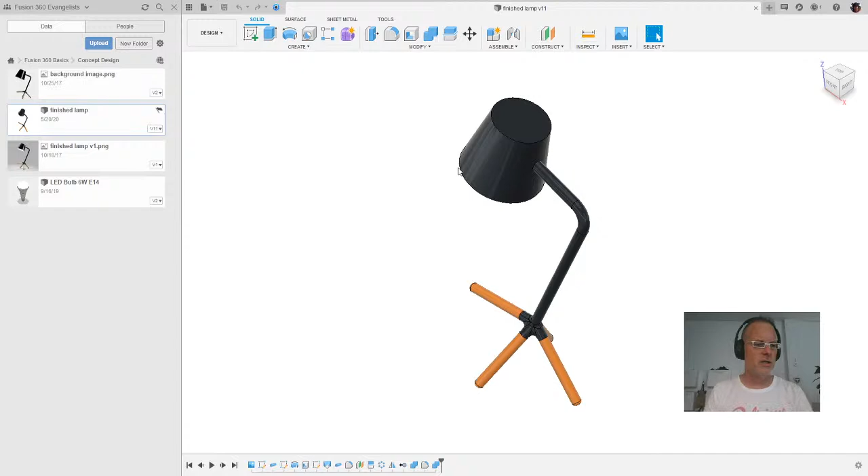And for today's example, I might as well go ahead and open up a finished example so I can show you what we're going to be working on together today. And this is my Fusion. Perhaps you know it. I hope you love it. We're going to be doing a small little table lamp of somewhat questionable aesthetic, depending on whether or not you like this. And I hope that you will be able to follow along and actually click with me. It will be a little bit difficult, I think, to interact because the only option I have for interaction with you is through the chat. And so we'll see how this goes and try it out.

Now, why did I choose a table lamp like this? Well, to be honest, a number of years ago, I was thinking about what could I do as a very basic Fusion primer, and I thought about all sorts of things. And I've been in this industry for about 25 years, and I have worked with other CAD companies and other CAD softwares. For some odd reason, all of the initial tutorials were always small little desk lamps that were not really very attractive most of the time.

But after a lot of soul searching, I thought, well, why reinvent the wheel? So I made a little desk lamp as well. And this actually is a multi-part course that I've given many, many times, both live, and I actually have videos on YouTube as well showing how to make this lamp, going all the way from concept design to finished manufacturing design. So let's begin together.

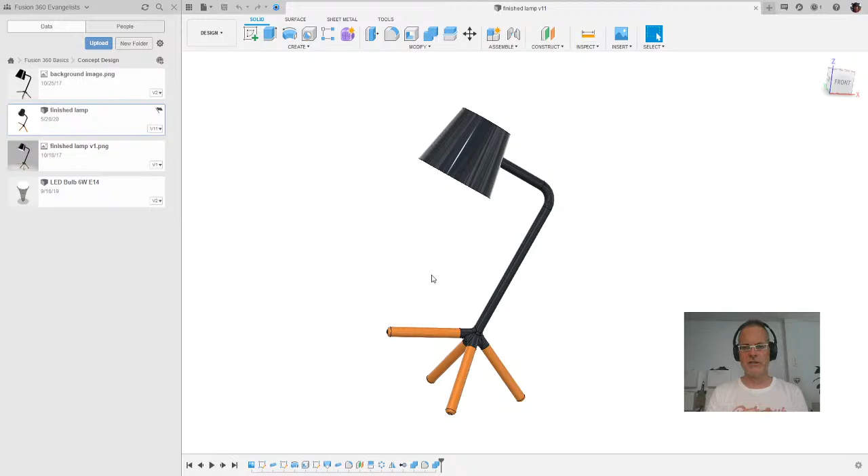One of the things we do quite often with Fusion is use a picture like this one as a kind of outline for what we want to design in the end. You can see I did this one by hand at some point, and I put it into Fusion. I used it as the basis of my design. We're going to do something very similar.

So I am going to make a new design. You should have Fusion open, and up at the top you'll see Untitled, and you will have a blank screen with nothing on it. I want to give you this picture so you can work on this lamp with me together.

Now you can see I have a picture here available, but it's in my project folder. I have a Fusion 360 Basics project, and in this project folder I have a PNG file, an image file out of Photoshop that I used. I could invite each and every one of you to this project so you could have access to this data, but I don't want you fooling around with my project. I really don't. So I'm going to give you this in a different way.

What a lot of people don't know about Fusion is that not only can you look at your projects here, you also have an alternate view on the web. Let me go into the web by clicking this button right there. This will open up your default browser, which should either be Firefox or Chrome, because Fusion likes those. In the background, my Chrome has popped open and there is a Fusion team page. I don't believe you can see this, so I will try to change my window capture to give you access to that.

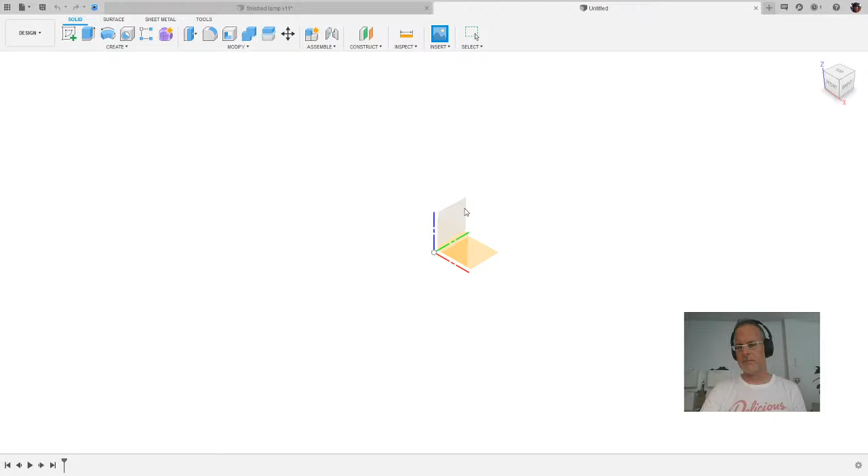Since I have a side view of my lamp that I would like to make, I will go on the right. You'll see over here the view cube. It kind of gives you some directions, and this is a help for navigation. We'll talk about that in just a moment. But I can click on this here, and that will highlight that, and this means the computer is going to put this canvas on that plane.

You'll see this funny thing often in Fusion. It is a translational command. We call it a gizmo. The reason we call it a gizmo is because 20 years ago in 3D Studio Max, they created this thing and called it a gizmo. It's sort of a silly name, but for the sake of consistency, I'm going to call it a gizmo as well.

If you zoom in very closely using my middle mouse wheel, you zoom in and out and you will always zoom towards your mouse. So if you're zooming in a funny place, put your mouse on what you want to zoom to and roll the mouse towards yourself. This is also a setting in Fusion; you can change all this stuff, but this is sort of the default. You can zoom in and out this way.

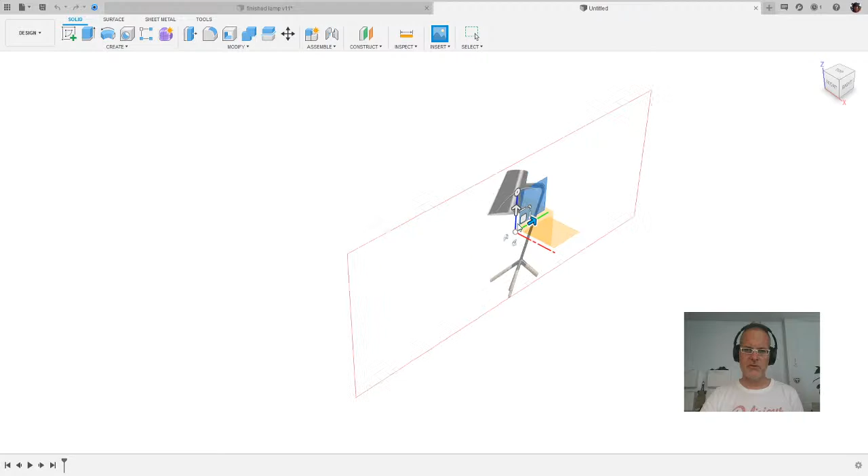In this way, the zoom works as a zoom, but it also works as a pan, because if I want to move over here and look at something, I will zoom out, move my mouse over here, and zoom back in, and I will be zooming into my mouse. I can also zoom back out, move my mouse to the area I'm interested in, and then zoom back in.

Also, if you're interested in moving around other ways, you can click on the view cube here in the top right. You can just click once on each face, and it will turn instantly to that face you're looking at. You can even click on the corners and the edges, and it will have those. If you get lost completely, just go Home, and it will take you back to an isometric view as standard.

And if you have nothing else on your screen, you can't find anything, you're lost completely out in space, down here at the bottom you have an option. If you pull down on this pull-down right here, you will see there's an option called Fit, and this will fit all the geometry that is in your model on your screen. If you've lost everything, that's usually a good plan.

As there is always one or two who have this issue, I will describe it again. If you see nothing, go here to Fit—well, you won't see a Fit, you'll actually by default see Zoom Window down here on this little magnifying glass. You'll have this little button right here, and you'll be able to say Fit, and it will fit your entire geometry on your screen so that you can generally see something and find your position again.

Now, there is nothing you really need to do with this picture except—I made a mistake, so I'm going to click on Fit.

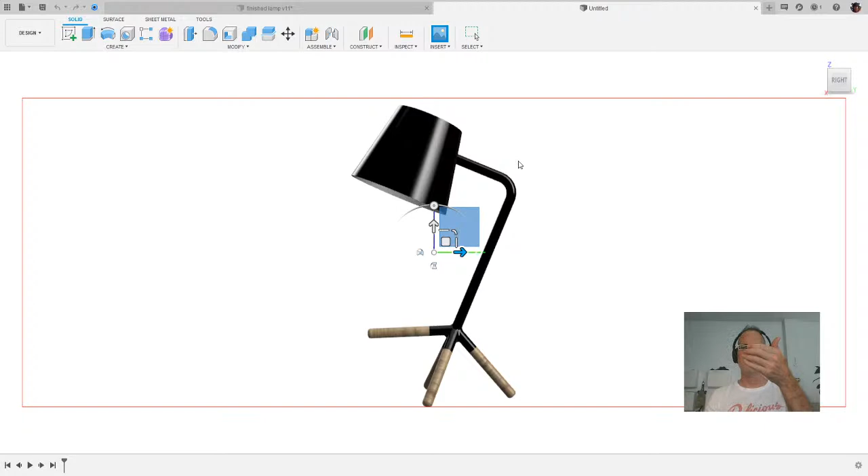There's nothing you need to do with this picture for now, except you'll need to set your canvas opacity. Your canvas opacity will be 100%, which means you will not be able to see anything behind this picture. That is a little bit odd. If you look at the webcam, I believe you can see my face right now. If you have a picture here, and you're modeling something back here, and your canvas is not a little bit see-through, you won't be able to see the thing you're modeling. So we want to make the canvas a bit see-through, and I usually make it just under 50%.

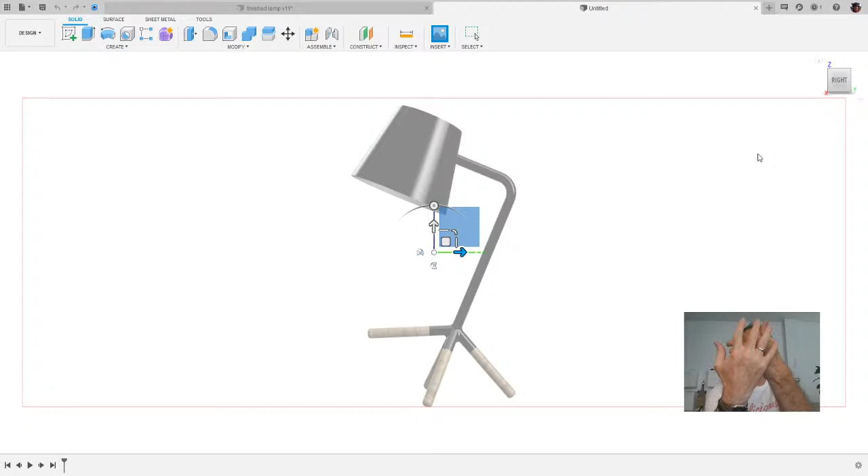In the same way, if I am modeling something in front of my picture, I won't be able to see the picture. So there is a nice little option here called Display Through, and you'll want to select that as well, because this button will use the magic of 3D CAD to allow this picture behind the object you're designing to shine through that CAD model. If you set this once, you will never have to change it again, because Fusion is persistent in this case, so it will stay this way.

And this is the way I always use it, and I do recommend it. All this other stuff is important, but we won't use it for now. So just click OK, and you should be able to see a picture very similar to what I have here.

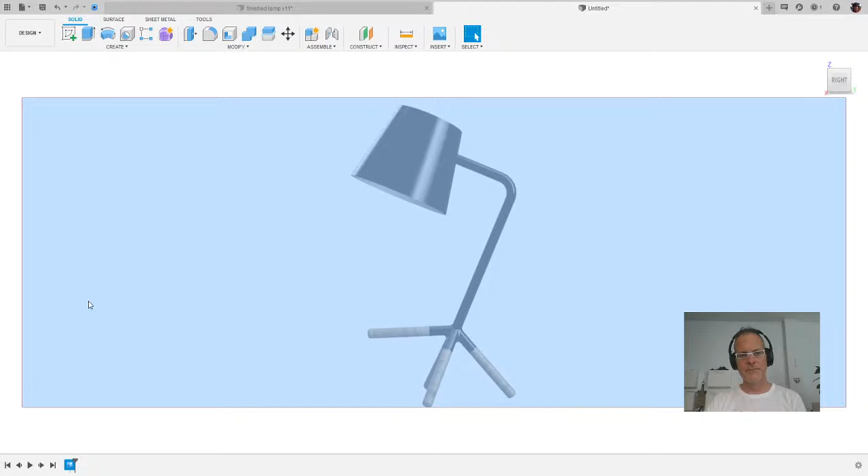This canvas and this canvas are exactly the same thing. It's the same thing in two different places. You can also right-click it here, and you can say Edit Feature there, or you can do the same thing up here, or if you're so inclined, you can even just double-click on this, and you will get back into that Edit Feature command. This looks just as before, and if you miss that opacity, you'll have something that looks like this, and you might not even have this display through business here.

So all you have to do now is change your opacity down to something below 50%, and then you'll also be able to say display through, and this will be okay. And all those renderable stuff, all that other stuff, it's for another day. It's fine for now. And after you're done with that, you can just say okay.

All right? Go back to the chat, see if there's any other questions in there. I hope that helped you, SuperPot. You can tell me later. All right.

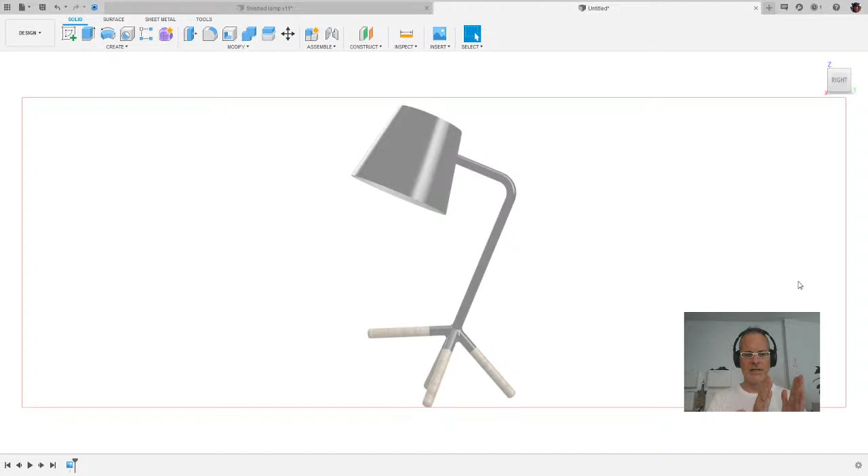Give you some time to catch your breath, and this is where it starts going on a little bit quicker. Trust me, at the beginning of all these, it seems like it just takes forever to describe even the most basic stuff. But Fusion is like most CAD systems. It has a consistent workflow. And so everything you're learning now pretty much applies to everything else you're going to do later. So at the beginning, it's very, very slow. And later on, you'll see we're going to be picking up speed very quickly.

It'll take us 85 to 90% of the time to do about 20% of the work. And then once you've got the workflow down, you'll knock this lamp out in no time flat. By the way, just so you know, I expect this to take about an hour and a half in general. But once you know how to do this, you can literally design this lamp in 2 minutes. And if you don't believe me, look at my YouTube channel. I do it. It's pretty easy, and you'll be able to as well.

So now that we've got a background picture, we are going to begin creating the core, the basis of our geometry. And there are several ways to do this, but the most common in parametric CAD systems is to create a two-dimensional sketch. We generally do this because two-dimensional sketches give us relationships and they give us the general form of things. And then we use those two-dimensional sketches to create 3D geometry in a secondary step. That is the way most of the time we work. It is not the only way we work, but since it is the basic way of working, it's what I'll show today. So what we're going to create is sort of a stick figure of our lamp.

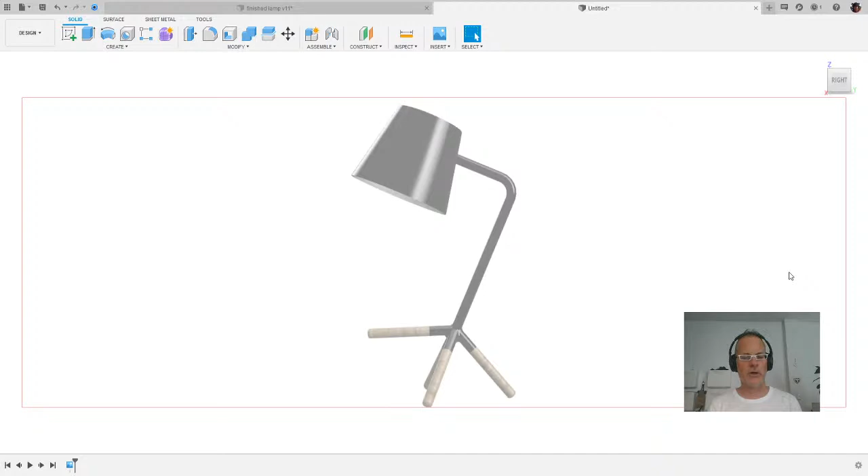We shall begin. Similar to the way that we inserted a canvas, we are now going to create a sketch. That is under the Create pull-down menu. There is a command here called Create Sketch. It is also available here, naturally. But Create Sketch. Similar to what the canvas did before, your tooltip will tell you, if you keep your mouse still for just long enough, select a plane or planar face.

A sketch is generally assumed to be a 2D sketch. This does not have to be the case in Fusion. We do have 3D sketches, but let's forget about that for now. It is not basic stuff. So we're going to be doing 2D sketches today, and as a result, we need a two-dimensional plane on which to sketch. Since we do not have any geometry, all we have is a picture, the system again turns on the base planes.

If I hold my mouse button on the view cube and pull it, I can twist, right? And it turns on these, and it offers me these as a surface on which to sketch. In the same way that I did with my canvas, I am going to use that middle plane here, looking from the side. I'm going to click on that. Just click on it once. Don't hold the button too long or you'll get that multi-select thing that I just had turn up there. And now I am sketching on this plane.

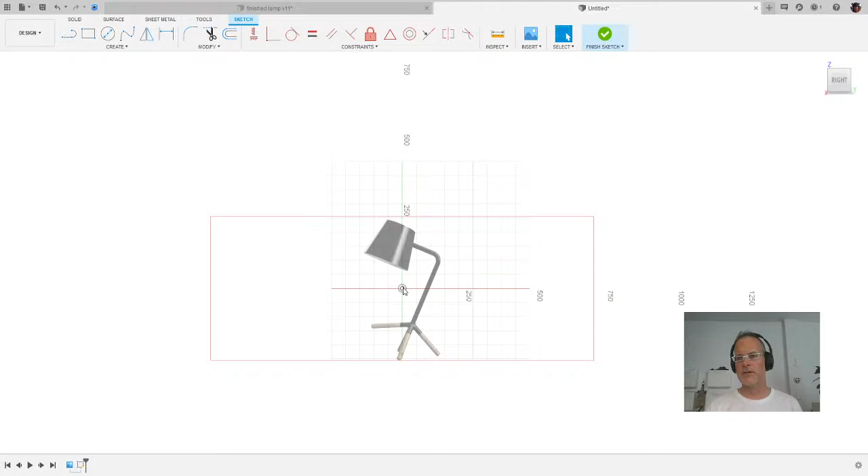Now, I have made a mistake, as is so often. I noticed that my origin is here in the middle of space, and that is not at all what I want. But don't worry, we don't have to worry about that. I can finish my sketch, and I can actually go down here and I can delete this sketch. So delete that sketch. Let's look at that from the right side again. That was, by the way, not planned, but I do it all the time, and it won't be any different for you when you're starting out.

What I want is to make sure that my origin is someplace that's useful to me. It's not really important, but it's kind of a nice thing to have because you can use that origin point to reference dimensions and all sorts of things. And if it's out here in the middle of space, I can't measure anything with it. I can't do anything with it. To see where it is, I can go over here with my eyeball and turn on my origin. And that will not only turn on my origin, but if I pop this open, you can see that there's the origin, there are the X, Y, and Z axes, and I also have those planes. So I'm just going to leave those on for now.

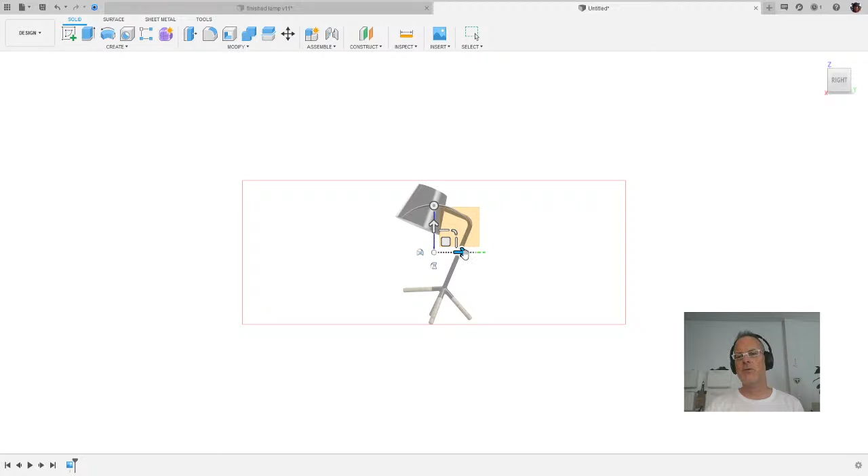And what I want is I want this point, the origin, to be someplace reasonable. Unfortunately, I can't move my origin. The origin is where it is. But what I can do is I can move my canvas relative to this. And SuperPot, you have some experience with this now. All you have to do is right mouse click on this canvas, and you can say Edit Canvas. And now for the first time, we're going to play with this stuff. Although we're not going to edit anything directly here, we can now use the gizmo to place this canvas with respect to this origin. And the gizmo will allow you to pull your picture left and right, up and down.

Don't mess with these, because they will scale your picture. If you click on these, they will change the size of your picture, and that is specifically not what we want, because if you scaled it in this direction, it will now be taller than the 500 millimeters that we wanted. So don't mess with these. These are just stretching it, right? But this one's quite nice. This allows you to move it in the plane.

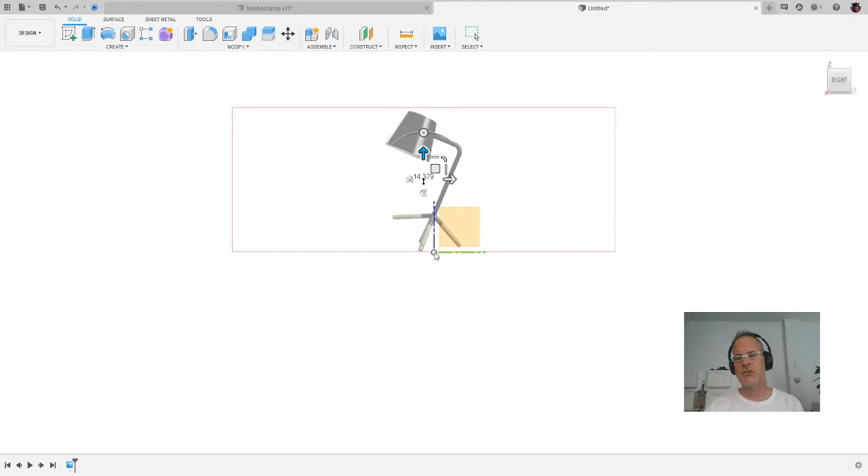And so if I move it in the plane and I kind of set it on the imaginary floor with that central point right at that connection point right there where everything comes together, that is a sensible point for my origin, because this is sort of like a fake ground. Although you have to imagine, CAD doesn't know anything about where a ground is, where a tabletop is, or anything like this. So this is all just imaginary, but it is kind of useful for me. So it's going to come in handy later.

And so I'm quite pleased with that. If you're not exactly sure about the position, you can zoom in with your middle mouse button and try to get it really nice and sharp. But, you know, let's not let the perfect be the enemy of the good today. And once you're happy with this placement, more or less, you can say OK.

All right. Now I'm going to go back to the chat and see if everybody's freaking out here. Got it. Am I correct in assuming Fusion 360 calls layers canvases? No, you are not, SuperPot. You're not correct in that. Layers are a completely different concept. Comes out of AutoCAD. We don't have layers in Fusion. Everything is there in one layer, if you so like. And we don't turn layers on and off, we turn entities on and off.

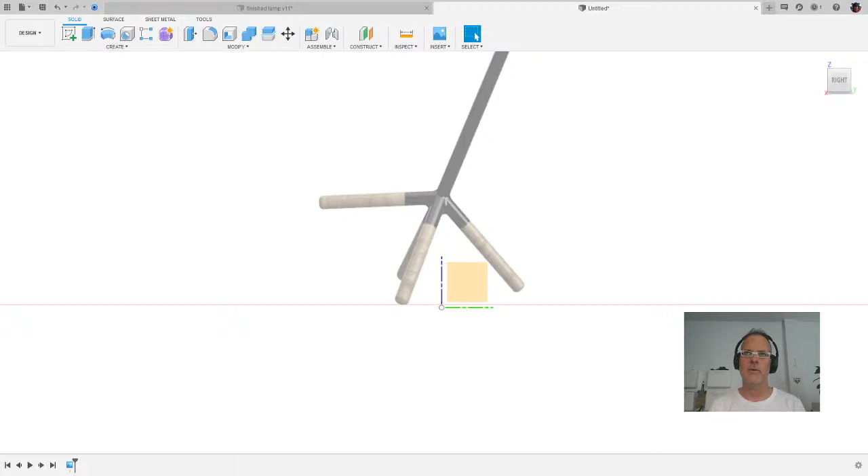We can turn sketches on and off, we can turn construction geometries on and off. We can even turn bodies and components on and off, at least in their visibility, but we don't have the concept of layers in general. There is actually one exception, but let's not get into that now. All right? That's going to be a change for you. If you're talking about layers, you're obviously coming from the AutoCAD world. And it's a bit different, but don't worry, you'll get it. Now back to Fusion.

So we've now got this thing placed, and if you're so inclined, you can fit it again so that I can see the entire picture. And I'm going to begin sketching as I wanted to before. Now this is good practice. How did we sketch? We said, let's create a sketch. Create sketch. It's going to ask you with the tooltip, select a plane or planar face. This one is quite nice. Let's take it, and it will zoom onto that and kind of position that. That is also a setting in Fusion. You can turn it on or off, but I'm going to leave it as is for now.

And we're now looking normal to that plane, and we have our sketching environment here, and we have what's called the sketch palette here. All of you have turned off your 3D sketches, and I certainly hope you've turned off your incremental moves. All right? So now we will begin with the most basic of all sketching commands, and that is the line. Here is a line. Don't click it, but we can also use Create, Line. Same thing. And here again, just like with the canvas, just like with the sketch plane, it will tell you what it wants if you just leave your mouse still long enough. And it's saying, place your first point.

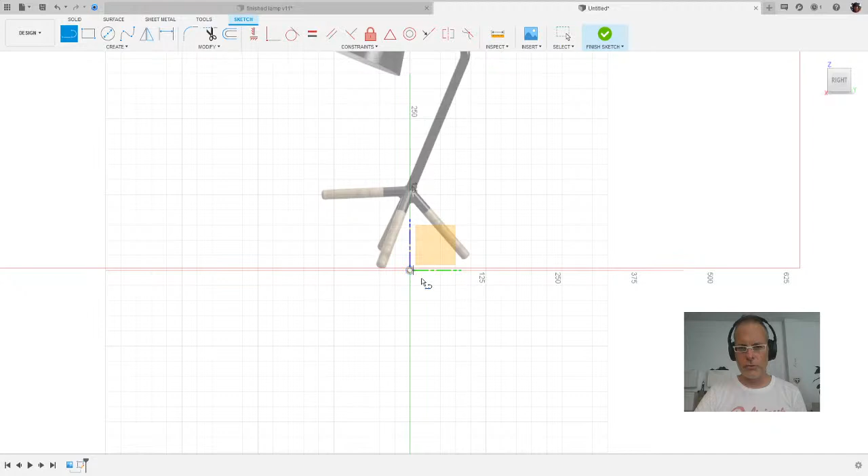And you could place a number of first points, but together we're going to place a first point round about here. And I want to make sure that it is exactly in line with the Z axis. And to do this, I'm going to use a trick. If I move close to the origin, you'll see that eventually this thing will actually snap to that origin. And there's a little blue square, which men over 40 have a really difficult time seeing. But it's there. And once I snap to it, I don't want to click. I just want to move it and it'll snap.

Once I move there, anytime I get in line with that origin, it's behaving strangely for me right now, it will actually sort of snap to that line as well. Same thing will happen here. And that's quite handy because if I get in that line, then I can sort of move along here and I can pretty accurately hit the middle of that and click my mouse button once. Just click it once and then let go of it, take your finger off of it, and move it away.

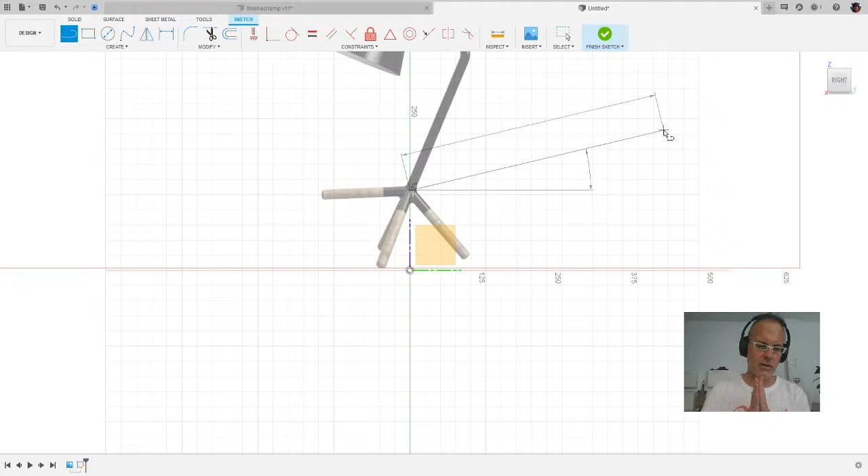By the way, if some of you are out there in the Mac world and you're working on your touchpad, stop it. Stop it right now. Go steal some Windows user's 3-button mouse and use it. And for all of you that are going, no, I am much faster with my touchpad. No, you are not. I have trained several thousand people on this software. You are not even close. You'll also mess your wrists up big time if you do this for 20 years on your touchpad. Go get a 3-button mouse. You'll be much happier. It's not just a Fusion thing. If you're going to be working professionally in visualization and CAD, you're going to need a 3-button mouse.

It's really important. All right? So click it once, move it away, and you'll see it's creating a line for you. And there's actually some places for you to put some numbers in, but we're not going to put any numbers in. I'm going to roll out with my middle mouse button, and I'm going to kind of eyeball it because that's the purpose of having this canvas. And I'm going to eyeball it so that I'm in the middle of that, and I'm going to click it again. Just doesn't have to be perfect, y'all.

Just click it once. And so I've got a little blue line there, and it's going to create another line. And so I'm going to actually take the system up on that suggestion and move it over here. And you'll see if I get close to perpendicular, you'll see a little blue rectangle turn up there as well. And that's going to let me know that it's a perpendicular corner, a 90-degree corner. And I can click and I can release again. Now I could keep creating lines till the donkeys come.

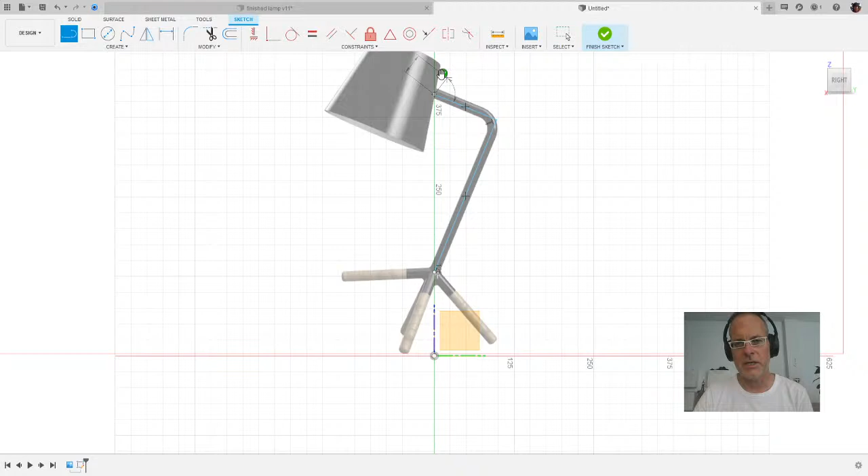But what I'm going to do is I'm going to either hit the check mark here, which is supposed to be nice and convenient, or sort of a hidden command that most people know about but never talk about: you can always exit out of a command in Fusion by pressing the escape key. Unfortunately, you can't see that here in YouTube world, but I just pressed the escape key, and that means that I am out of the create line command. And so I had these 2 points, these 2 lines that I just created.

Now, what's so special about these lines? Nothing. But I want to show you a few things that you need to know about how these line sketches work, right? First thing you'll need to know is that once you've hit the escape key, I'm out of that. So I can still go by and I can still click on these things. And because they are blue, that means they are not fully defined. That means I am perfectly fine to move this stuff about. I can move it anywhere I want, right? There are some rules that are being kept, perpendicular, right? So I can take this, but I can't make it not perpendicular to that.

Unless, of course, I don't like that perpendicularity. I can click on that and I can hit the delete key, another hidden command. I have to hit the delete key, and now perpendicularity is not defined there, and then I can move that back and forth anywhere I want. You'll notice that if I get close to this, it'll tell me, oh, it's going to be horizontal. And now I'm stuck again at horizontal. If I don't like that, I can delete that as well, and I can do all that kind of stuff.

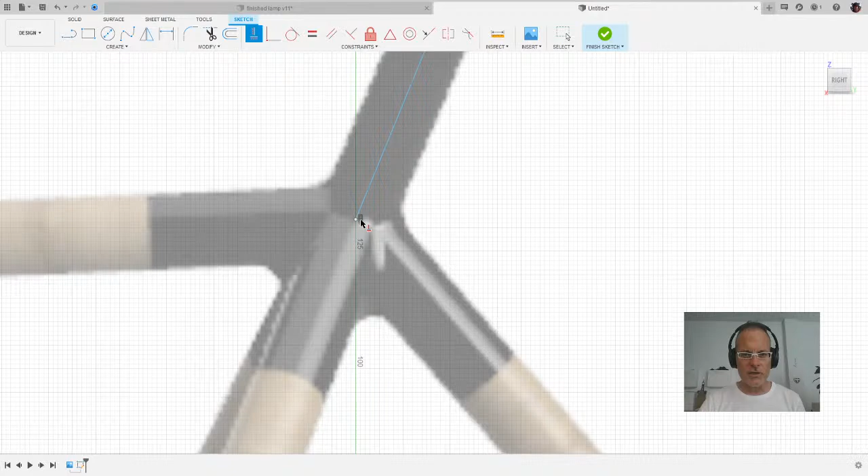So in this particular case, I will hit the escape key to make sure nothing is selected, and I will say horizontal/vertical, and I will select the origin, horizontal or vertical to that point right there. And you'll notice that nothing much changed, except for the fact if you zoom in a little closer, you'll be able to see there's a horizontal/vertical, and this is actually in a pair. So if I press the escape key again, and I select it, you'll see that they will match up in pairs.

So I know that these two are actually horizontal or vertical to one another. And so I can see some relationships like that. That's quite good. You can try moving it about. You'll see that I can only move it in a line, but I want it to be a little bit more closely defined than all that.

And so I am going to make a dimension between here and there. Here again, we're going to go create, sketch dimension, and I am going to click there and there. And I'm going to say that is going to be 130, just a nice round 130, something like that. All right.

Now, I'm going to undo all of that on purpose because I want to redo it with you. All right. Get me back to my original situation. That looks pretty good. So let's go in and redo this. I'm going to hit the escape button to make sure nothing is selected, horizontal, vertical between this point and the origin, escape key to get out of that command, and then go and create a dimension, create sketch dimension between this point and this point here. And I'm going to make that 130.

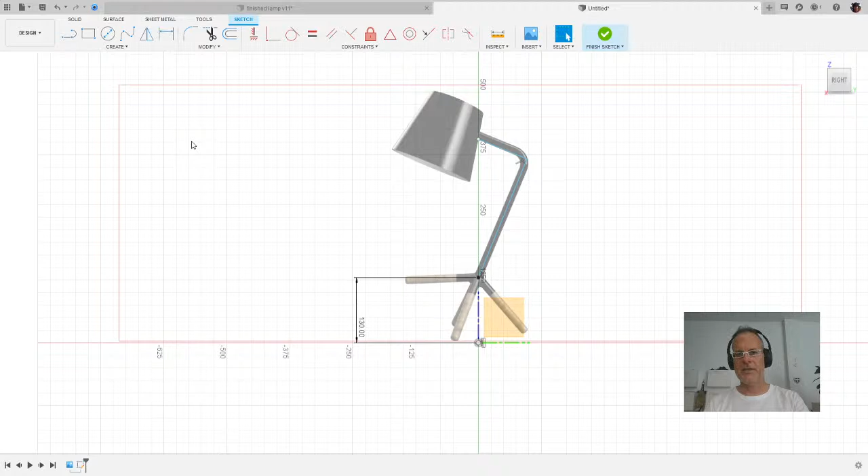One of the things you'll notice is that it still wants to create more dimensions for me. You can see that on my tooltip. I'm going to hit my escape key to get out of that, and I'm going to point out to you the fact that this little point right there just turned from being white or blue to black. And the reason for this is this black thing says it is fully constrained. It can now move in no direction whatsoever.

It must be on this plane because we're sketching on this plane. It must be vertical to this origin, because we set that up. And I define the distance from that origin using the dimension. So as a result, this is fully constrained, and I can pull on it all I want, and that will not make any difference whatsoever. If I pull on this stuff, everything else will still move, but that won't. Let's undo that, make sure we're back to where we wanted to go.

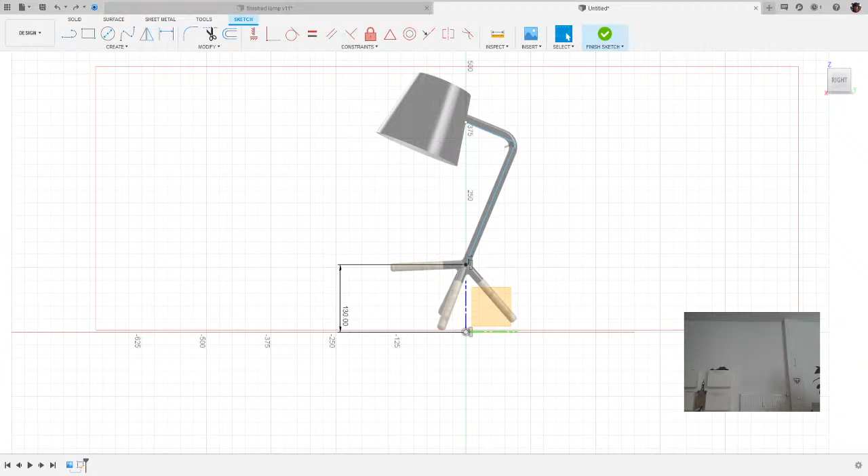And while I'm waiting, you can notice I'm doing quite a bit of talking. While I'm waiting for you to chat, I will go get myself a drink of water. It will be about 20 seconds. Seeing as how my wife banned me from our communal office because she has a meeting and I am in the kitchen. So that's handy at this moment. COVID's not easy for anybody, least of all me.

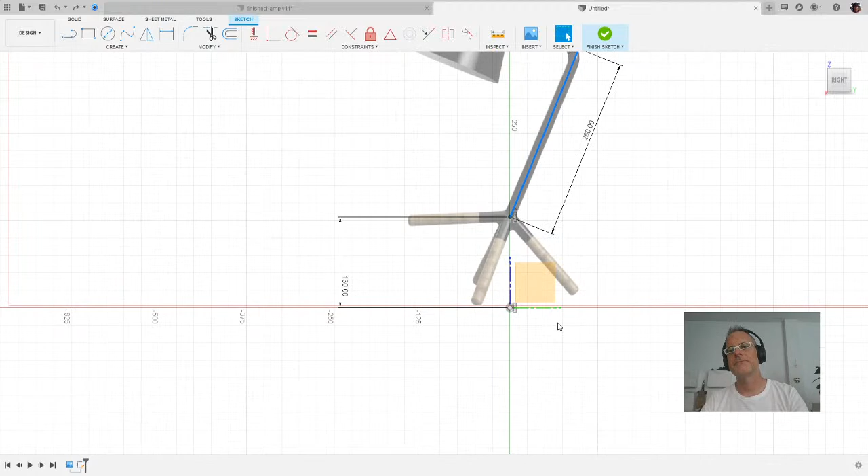Why is this? You can see this green line down here—it is your Y axis. Why couldn't you grab that and dimension to it? Well, in some other CAD systems, you can—they allow that. Autodesk in general doesn't allow this sort of thing in any of their CAD tools, and with good reason.

When you create a dimension between this sketch entity and this y-axis, you are creating a relationship between these two items forever. And we believe at Autodesk it is best that you are always aware of the relationships you are creating. As a result, we only allow you to create relationships between items within a sketch. This is visible, but it is not in your sketch—it is reference geometry outside of the sketch. If I want to have it, I must bring it into the sketch. This is a special thing, and for a lot of people it is a big pain in the butt.

But it is good for creating robust models that will update themselves correctly when you make changes later. All right, I could sing you a song about this. So how do I do this? How do I go about getting this into my sketch? And by the way, you don't have to just do this with the y-axis, the z-axis, or the x-axis, or any of these other things—you would have to do it with any other geometry in an assembly that you would want to reference.

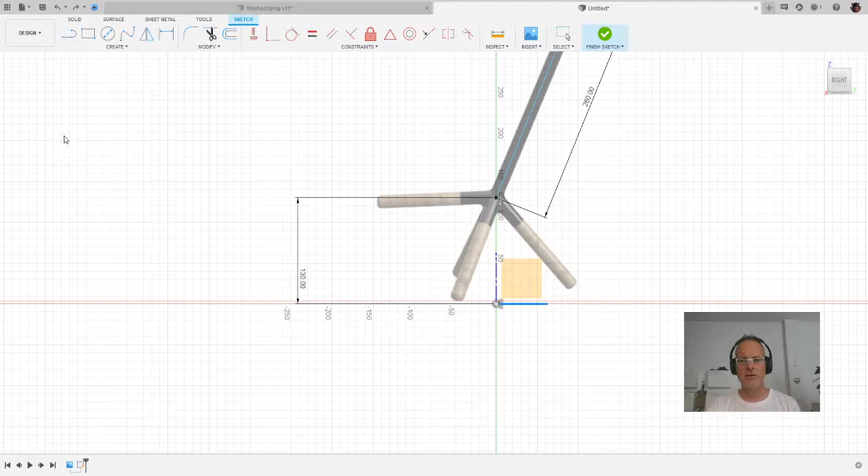Doesn't really matter, it's basically the same thing. You can click on it here, you can click on it there—it makes no difference whatsoever. You can click on it. One is selected, and you hit OK, and you will see a very small, very faint purple line in there.

Now, my personal belief is that this purple line should be much thicker and much larger. I don't know why we haven't made it much thicker and much larger, but that's the way it is. But now this element is actually in your sketch. And now I can hit the escape key and I can say create sketch dimension, this back edge, or that back line, and this line.

When I click those two in succession, I can create an angular measurement, and I could say that looks to me like it is 68 degrees. Bam. You'll notice that when I did this, just about everything in the sketch turned black except for that one white point. If I hit escape, you can see everything else is stuck, but that can still move in and out, no problem.

That is quite a lot to handle, so let me undo that again and let you follow along a second time with me. Let's get rid of that projection and look at it again. If you've lost yourself, just go into fit, make sure you're looking at everything head on.

Again, we need to have elements in the sketch to be able to reference them. So we need to get this y-axis into the sketch by projecting it. This happens through create, projection include, project.

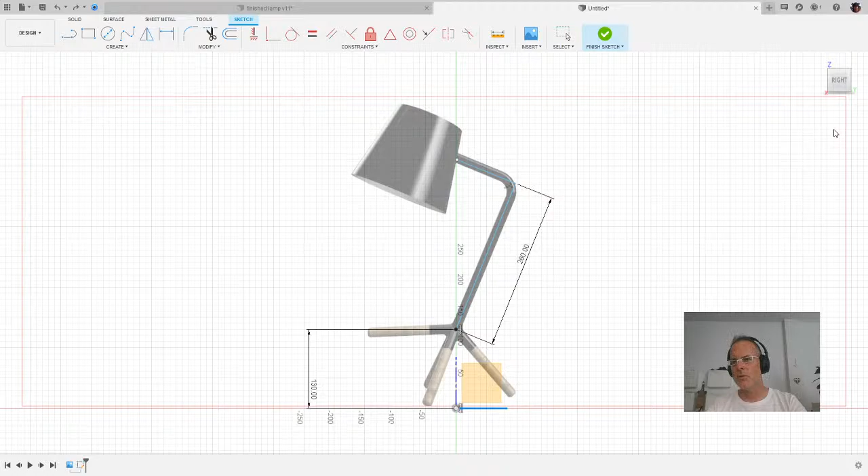Click on the Y. You will see here that you have one geometry selected. You can hit OK, and you will see somewhere down here a very faint purple line. This is also a setting for what color that should be and all that sort of stuff, but default is purple.

You have now projected that into your sketch. As a result, you can use it as a reference for a dimension. We will do this by saying create sketch dimension, this line, and this line. Then you just have to move your mouse someplace else and place it. Then you decide what that angle really should be. I'm going to make it a nice round 68 degrees, and then everything should pretty much turn black.

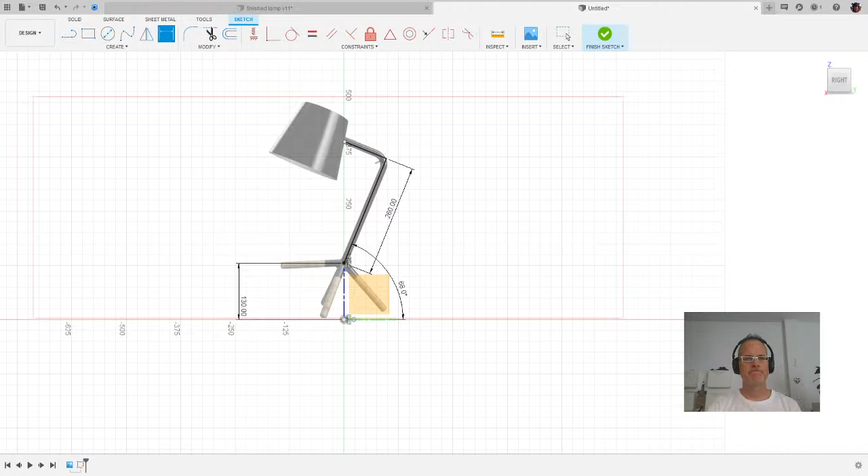So far, so good. Now we are making progress. We have a black line here, everything black lines here. So we can continue on with the rest of our two-dimensional sketch.

I will press the escape key and create another line. Just like before, pull down menu, create line. This time, I'm going to go up here and eyeball it. I'm going to try to grab this corner. I'm going to punch once on my mouse there.

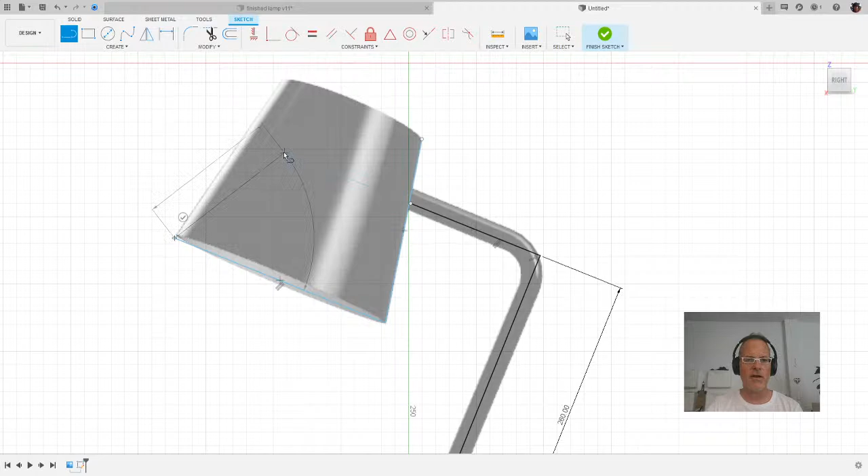I'm going to go down to this corner here, and here again, don't freak out because you can move these things later. I showed you that earlier. So just click on there, get over here, get this just about right. It doesn't have to be perfect, and you can click over there, and then you can go up here and click on that.

And here's where things get good. Once you get close to this over here, you'll see that it snaps. And you want it to snap. It must snap, as a matter of fact. It must snap to that point right there.

When you do, pay attention closely to this color in this area here. You'll notice the color changes oh so subtly. Also quite difficult to see sometimes, especially with the canvas behind it. But I can turn off my canvas, I can show it to you. Turn off my canvas using the eyeball. And you can see that this shape now has a color associated with it, this faint blue color.

This is not telling you that we have a plane. What this is, is information from the system telling you that this is a closed contour. And this is of immense importance in other downstream operations.

If you can imagine, if I were now to tell the computer to draw this shape out, this trapezoidal shape, out in a linear fashion into or out of the screen, we would get a three-dimensional volume, sort of a cubish kind of shape, yeah?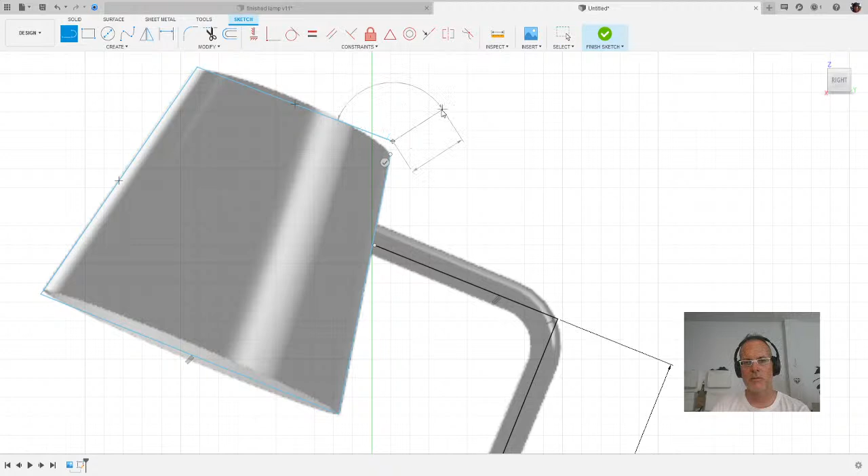If I did not have a closed volume, I will simulate this. This is wrong, by the way. You would have something like this. If we got anything at all, I would get sort of a shape like a piece of sheet metal that was pulled out into the screen or away from the screen. This is not what we want at all.

What we definitely want is a closed volume, and they should actually snap together, and you can see that happen. So if you've turned off your canvas like I did, turn it back on so we can see it. That's fine, you just want to see that color.

And when you move your mouse over it, you can see it quite clearly. This is the highlight, pre-highlight.

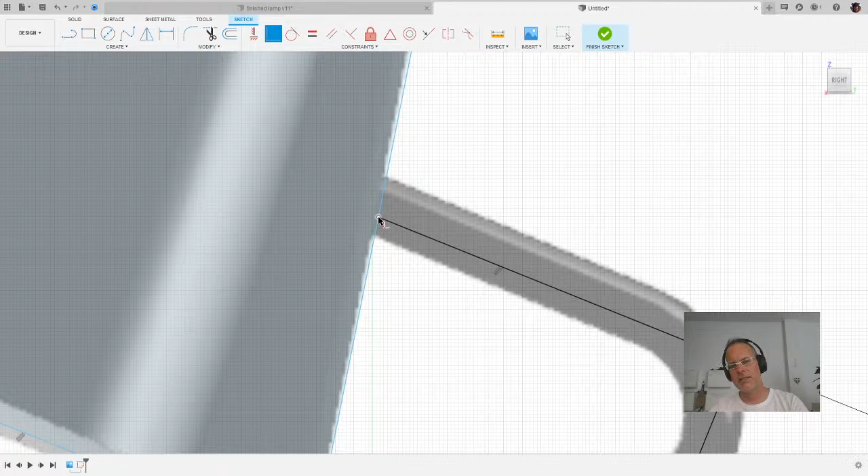Now here again, we're going to use some dimensions and some relationships to make sure that things fit. So I'm going to hit the escape key. One of the first things I'm going to do is say that this point and this line should be coincident. I'll hit escape to make sure I have nothing selected, and say let's make coincident this line and this point. You'll notice now that this whole line just shifted over slightly to meet that point, and these are now coincident, and they will always be so.

That is good. Escape button. The next thing I might want to do is make sure that the shape is symmetrical. Obviously, it is a symmetrical shape in every way.

So I'm going to create a line, and I am going to go from the middle of this, and if I move my mouse slowly over this line, you eventually see a little triangle appear. This is the midpoint of this line. Once I get there, I'm going to click with my left mouse button, and I will now be at the midpoint of that line exactly. And if I do the same thing along the bottom, you'll notice eventually I'll find it there as well. And so I can do that.

Now you may ask, what good is this? Well, this gives me a nice center line to work with. So if I now hit the escape key, get out of that command, I can now use the symmetry constraint.

Symmetry constraint is quite complicated. It's one of the most complicated we have. I hit the escape key, make sure nothing is pre-selected, and I can say symmetry. I would like you, dear computer, to make this line symmetrical to this line about this line. And these things will jump all over the place to make sure that these are actually symmetrical.

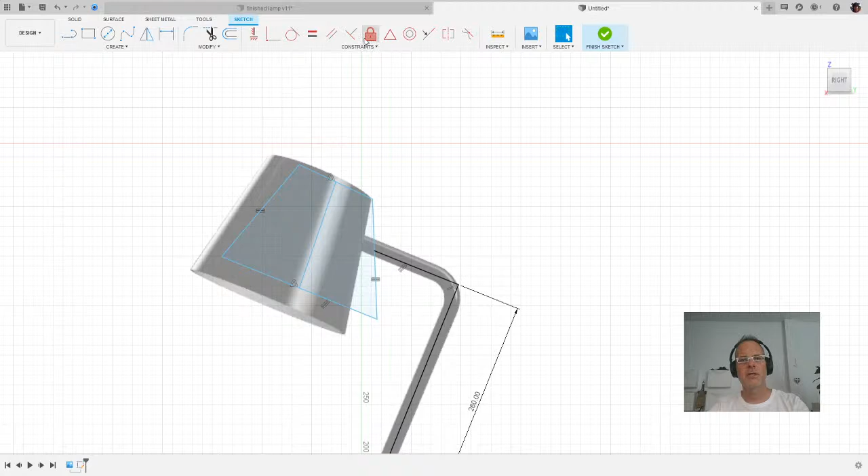If they are then equal and symmetrical, escape key, symmetry, this line and this line are now symmetrical about this line. It's telling me it's having some difficulty doing this. It can't figure that out. But what I can do, and I can move things around to see how it's behaving, I can hit the escape key and I can actually say that these 2 should be perpendicular. And because this is the midline, the midpoint, and the midpoint, if I make these perpendicular and these 2 are equal, they are, by the rules of geometry that I learned in the 3rd grade, they should be symmetrical as well.

So it's a bit dicey here. We're getting close. Let's go to create. Actually, you know what? This is horrible. This is not working out for me at all. Let's undo all this business. Let's tackle this a different way.

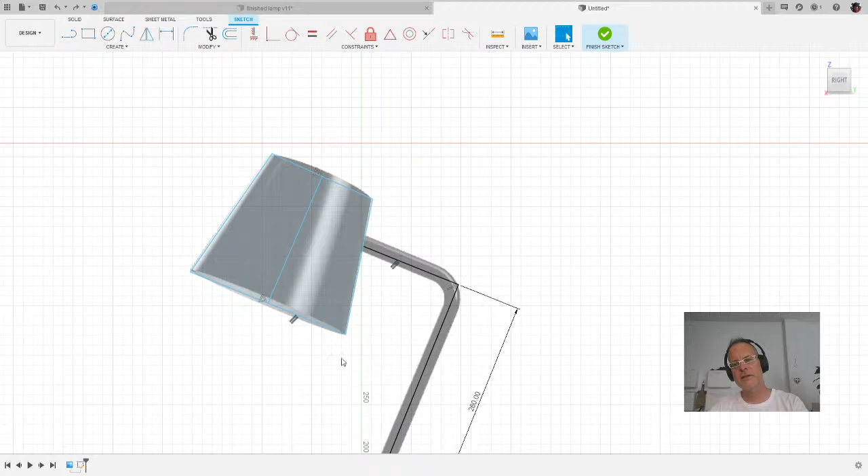I quite liked having that midline. I think that's quite good. I'm seeing something here that I got by accident. I didn't really want it. The parallel constraint that happened here, I don't want that one at all. So I got rid of it, clicked on it. Let's create a dimension. Let's actually dimension this out first. This looks to be about 110.

What I do want to say is that this should be perpendicular to this, I think. Looks to be just about perpendicular, so let's do that. Escape, perpendicular between this and this. It's quite nice. So now we have that orientation. And I believe also it's quite important that these and this, they should be parallel to one another. So escape button and say parallel. So this and that should be parallel to one another.

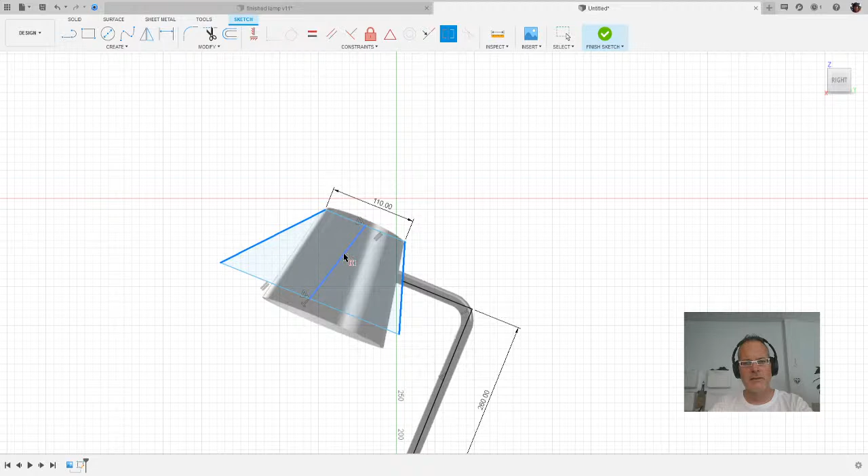This can still move about in a funny way, but if I now go in and say symmetry between this, about that, I think I'll get closer to the behavior that I wanted before. Of course, you know, could be horribly wrong. It's not always easy being a CAD user.

One thing I do see is that this and this have some sort of relationship to one another also. And so what I could do here is I could say dimension. Oh, I did that wrong. Create dimension, sketch dimension. This. Now, I could enter a value here, but I want to show you something about parametrics. If I go with my mouse over here you can see that this dimension here is called D4. That is its internal variable name, and it is 110 millimeters.

If I click this, this means this will also be 110 millimeters. But I can easily use mathematical constructs like times 1.66 to make this 2/3 larger than the other. And this means if I do this, that the top and the bottom will be forever related through an equation. If I change this to 100, this becomes 166. If I change it back to 110, that is 182.60.

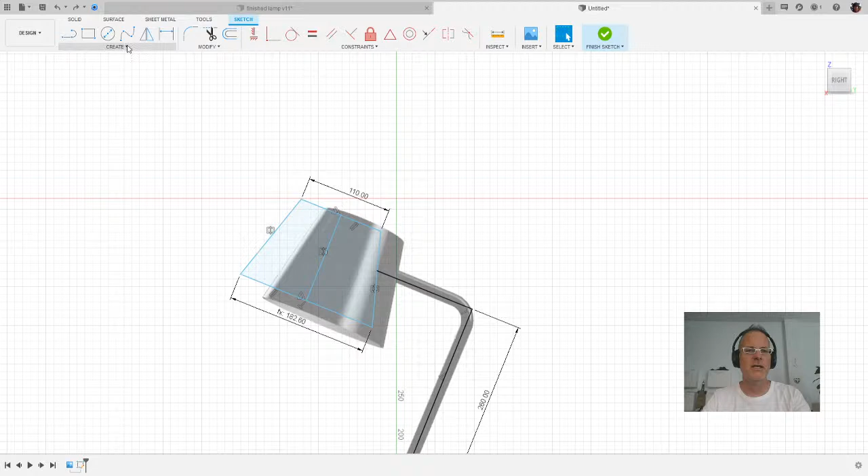This is just a very small bit of parametric design, and if you do this well, you can make very complex machines that will update through the change of a few key parameters. All right, I just want to open your eyes to that, nothing more. Now the other thing we can do here is define the overall height of this lampshade. And so I'm going to press the escape key, create sketch dimension from this top line to this bottom line here, and I'm going to place that sketch dimension.

That doesn't look quite right to me. It needs to be a bit larger. Let's try 125-ish. That's not quite what I think it should be either. Let's double click it again and do 130. You know, even that's not really getting it. Let's do double click again, 135, and we'll see if we can get any closer than that.

Eyeballing it is easier if it's in the right spot, so I'm going to hit the escape key and see if I can move things a little bit better now that everything has been sort of defined closer to what I want. And I can see, yeah, we're getting pretty close. Looks like it's pretty close. It's just not exactly what I wanted. It looks to be that those two sizes are a little bit off, but I'm going to live with it for now.

Now, the other thing I can do is put another dimension, escape key, so that nothing's pre-selected, dimension. And I can do it from the top to this line here. And you can see here that I should see something like 50. And I don't really know what's left. There are a few blue things here. And I can see the only thing that I can't really define anymore is like how long this is.

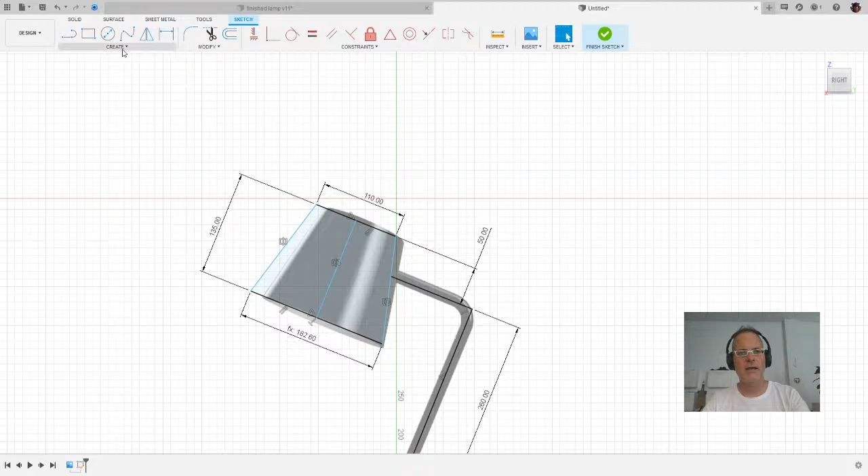So let's do that and escape key again and then do the sketch dimension of this line here. And let's place that out and let's just call that 110 as well. That may actually be a little bit much. Let's try 105. That looks pretty good. All right. Now, if you don't like where any of these things are, you can hit the escape key and you can start moving things around. That's not a problem. Just fine. But for now, everything is turned black, and even if it hasn't turned completely black, you're okay.

There's one last thing we want to do, is this curve through here. We want to create a round in the sketch. So if I go in and look at my different commands, one of the ones I have somewhere in here, oh man, sometimes I miss.

Let's, yeah, not create, of course, modify. We have a whole series of commands that modify existing geometry, and if I'm putting a round or a fillet on something, I'm not creating that. I'm modifying existing sketch items. So the fillet is here, and I can either select this and then that, or I can just go straight to the corner and hit that right there.

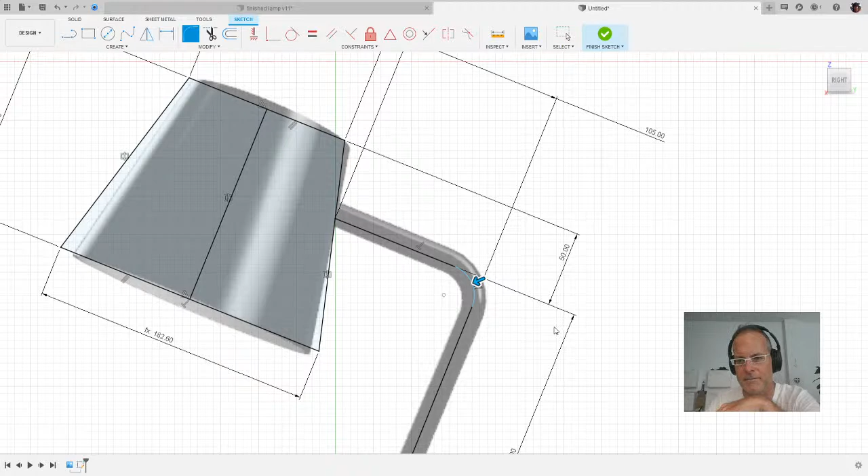I have an on-screen preview, and I can move it like that, and it looks to be like something around 20 is about right for that round in there. It's about what it looks like to be in real life, and so I get it there. Now it's going to give you a couple of errors or little warnings, and that has to do with the fact that we've got some constraints here, our dimensions, which are actually to that corner point, but that corner has now been removed. Don't worry about it.

Fusion fixes that up for you, and it kind of runs out those extension lines here and actually fixes that for you. So it's not too much to worry about in that case. It just gives you a short-lived warning, and that's what you saw there. It also adds tangent constraints to this line and the fillet, because of course a fillet should always be tangent to the items which it is filleting. So that's what those are right there.

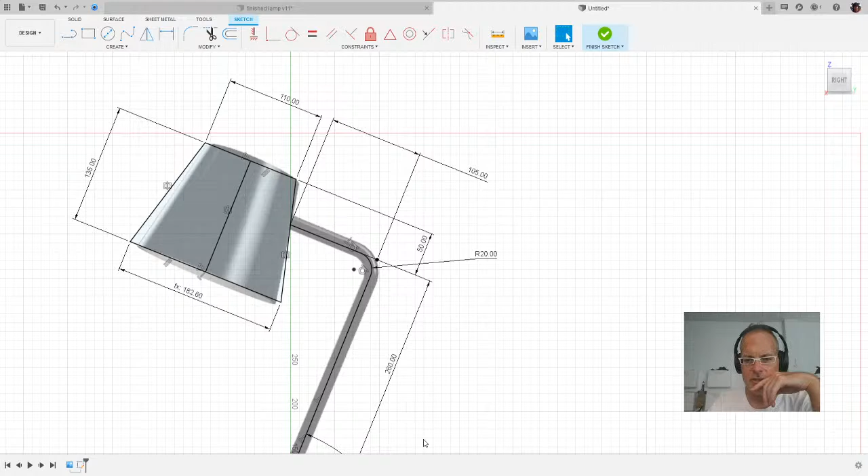Now, we are almost done with our sketch. If we go to the fit, again, I only have the legs down here with which I need to continue sketching. And this is going to be super easy. I am going to do this using the simplest method possible. Create a line, and I will go from this point here, and I will go down and snap. I'm not going to click. I'm just going to move my mouse to the origin, to the 0 point, and I'm going to eyeball this here.

Now the leg is actually short here because this was rendered using orthographic view, which made this smaller. So I'm going to go straight down to the floor, and I'm going to make this leg out here with the imaginary floor, and I'm going to place that one leg there. Now you could go here and you could add angles and lengths and all that good stuff, but just to prove to you that you don't have to do it, I'm going to leave this.

Now you're going to wonder, what about all these other legs? Do I have to sketch those as well? No, you do not. We will use this one to create one leg, and then we use some patterning techniques to create the other pattern, the 3D geometry. That's going to be the way we're going to do this, and it is a very efficient way of working and something you should do as well. Now, we are actually done with our sketch.

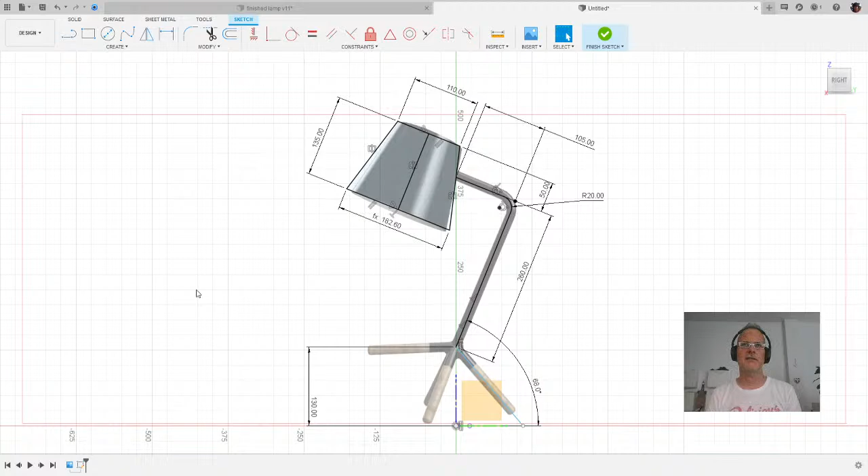And even if you may not believe it yet, we're just about done with our lamp, or at least our concept lamp, to get a 3D shape which looks like a lamp, which we could take to our boss and say, this is what we'd like to make. Now, that is just a concept. It's a long way away from a finished lamp that we could actually manufacture, but it's a place to start.

All right? So let's finish this sketch, and I will check that chat one more time to see if anybody's... Superbot says he's doing great. That's great. I had not expected anything less from this gentleman.

So we exit out of the sketch. If you missed that, I did it kind of quickly. We're in the sketch. We can just say finish sketch, or we can click here as well to say finish sketch. Doesn't really matter which you do. We're out of the sketch. The sketch is still visible. All the dimensions are gone.

This is just a default setting in Fusion. That's fine. It assumes that you don't really want to see the dimensions anymore, because if you want to make changes in those sketch dimensions, you would then edit the sketch by either right-clicking Edit Sketch or double-clicking on the sketch, and you'll be back in the sketch environment.

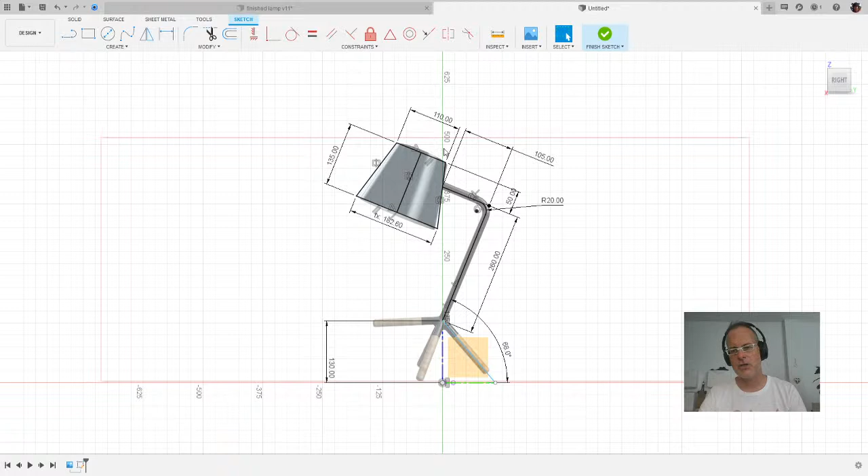You can make any changes you like, and they will then update. This is the principle of a parametric CAD system. So we're out of the sketching environment, and now we're going to begin creating 3D geometry. Now, you'll see our toolbar has now gone back to the 3D geometry creation tools. We do have a new folder called Sketches. It is here, and there is a sketch in there.

You can also see that in my timeline, I have a canvas and I have a sketch. That's going to continue as we add things. You'll see new things pop up here and new things pop up down here. And we are going to start creating geometry. Now, there is an awful lot of different geometry sorts you could create. And I have, on purpose, picked one of the simplest to begin.

There's a command, which is not typical for mechanical CAD systems. It's more typical for sort of design systems, called pipe. And we're going to use it to define this back arm here. That quite looks like a little piece of pipe or something that has been bent, and so we're going to use that to our advantage. There's a command here called pipe, and all it wants from me is a path.

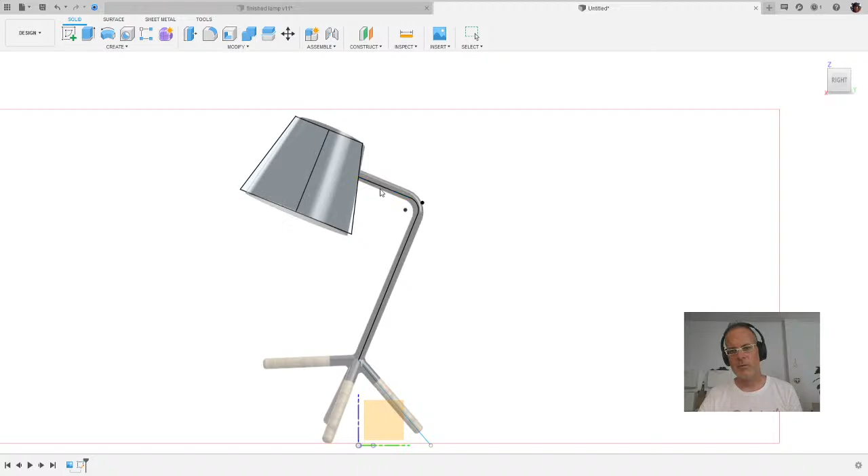Now what I want you to do, and this is important, you should turn off chain selection so that it doesn't just automatically select everything in one line altogether. I want to turn that off, and I want to select this, then that. And I just want to select this. Now you'll see that I've done this in the past, so I have a value of something like 20 in here because that looks to be about right.

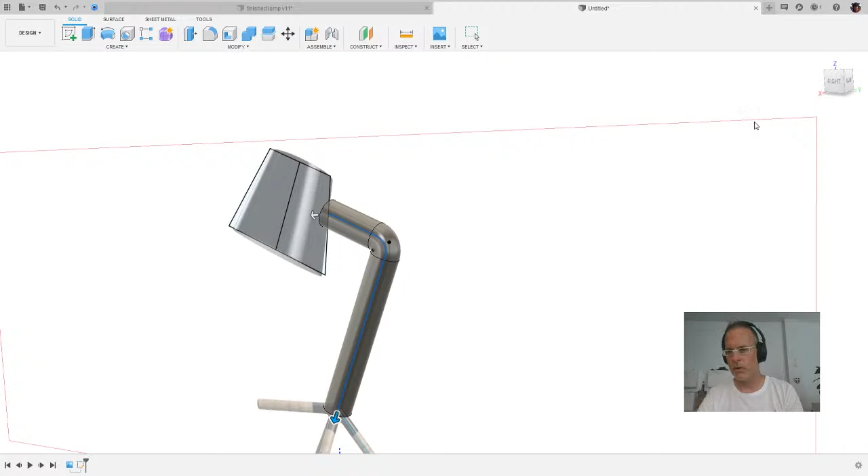If I look at the side, you can see that there's a place that I could make this pipe thicker, and I could actually move it along this path that I've defined. And there are actually some snap points in here. This path distance is a funny programmer-oriented definition. It goes from 0, which is all the way back here, that's 0, and it goes all the way to 1. This is programmer speak, from 0% to 100%. Why that is, you got me.

So let's look at it from the right. And that's going to make it a little bit difficult to see this area right here. But if you kind of look at your canvas and eyeball it, you can get in there and zoom in and check it out. And for me, I looked at it long enough and I decided it was like 18 or 20. I think it's more like 20 in my case. So I'm just going to say 20 is the thickness. And of course, I want the whole thing, so I'm going to pull it all the way down. It should be default all the way there, but if it's not, just make sure that distance is 1.

You have the choice to use some other shapes, of course, instead of circles, you can use squares or triangles, but all that's junk for now. We're just going to use circular, and you can even make that hollow, but let's ignore that for now, even though later in the real model we would need a space for a cable to go through there. But let's ignore that. We're making a concept model, and don't forget it.

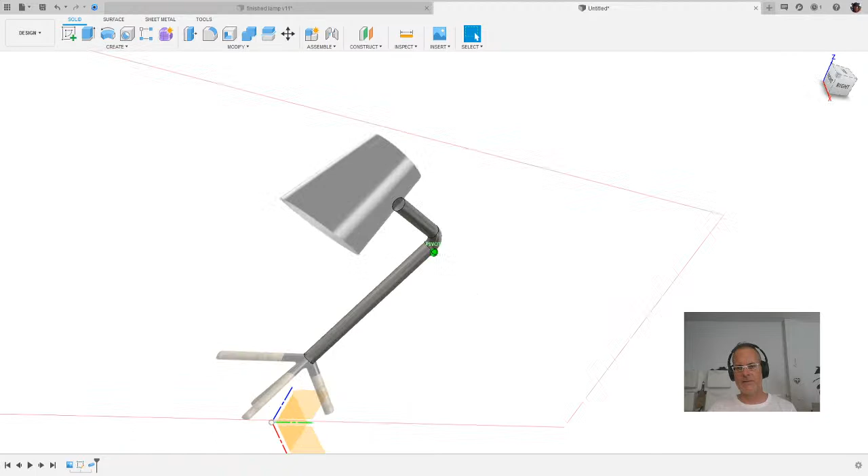There's also the concept down here of a new body. Later on that will be important. Of course we're having a new body because this will be our very first body. It is the very first 3D geometry that we've created. So as a result, we don't really have any other choices. Let's just say okay. And now we have created our first three-dimensional piece of geometry, and it is sitting there in space. And if you do not believe me, you can go to your home button.

You can fit everything up, and then you can turn off the canvas, and you'll notice that your sketch has already automatically been turned off because the system assumes, Mickey just made some geometry using that sketch, he probably doesn't want that sketch anymore. The system is wrong, but here is your 3D geometry in space. Now, one of the first things we're going to do is go into that sketch folder, and I'm going to turn that sketch back on because indeed we're going to be using it for quite a lot of other things as well. This is a default setting in Fusion.

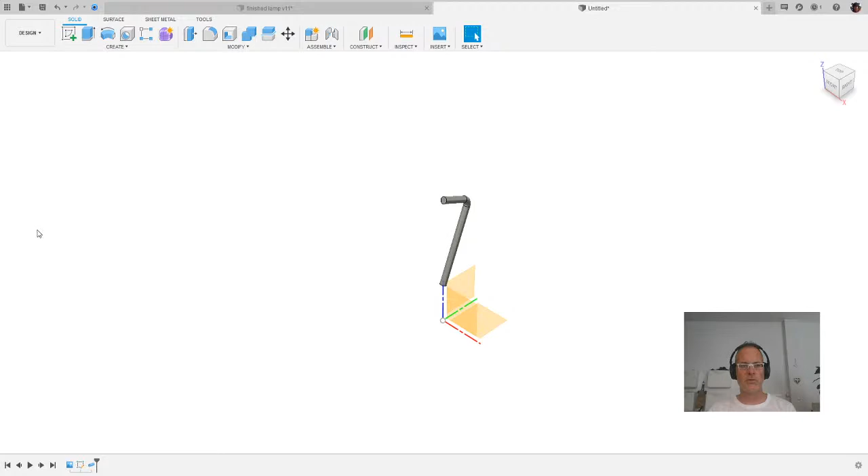You can turn it off so that it doesn't do this, but in general, when you use a sketch for the first time, it will turn its visibility off afterwards to try to unclutter your screen. We don't want that. We're going to open up the sketch folder right here, and we're going to turn the sketch back on. I'm going to look at it from the right, in case you've been spinning around and all this kind of stuff, and I'm going to fit this as well. So we're looking at it nice and clean.

Now, you may or may not actually want to have these canvases active. At this point, I'm starting to feel like the canvas is actually a little bit of a hindrance to me, so I'm going to turn it off. I'm going to turn its visibility off, and I'm going to use the sketch, which is now visible, as my basis for work, right?

Now, one of the things I'm going to do here is I would like to work on this lampshade. And this lampshade is a round piece of material. And as a result, I'm going to say create, and I'm going to use another command called Revolve. Now, if you go over each of these commands, you will get some cryptic little pictures that try to tell you what this will actually do. Some of them are more helpful than others, that's true. But in the case of Revolve, it's not too bad.

It will take a profile or a shape, and it will revolve it around an axis. And this is one of the reasons why I created this central axis here, because now I can take this half or this half and I can revolve it around this central axis, and that will give me a round lampshade kind of shape. So let's do just that.

Create, revolve. This shape profile is selected. I will need to select this to activate the axis command that I need. And then I can select this central axis. And it will then spin that and create a preview for me.

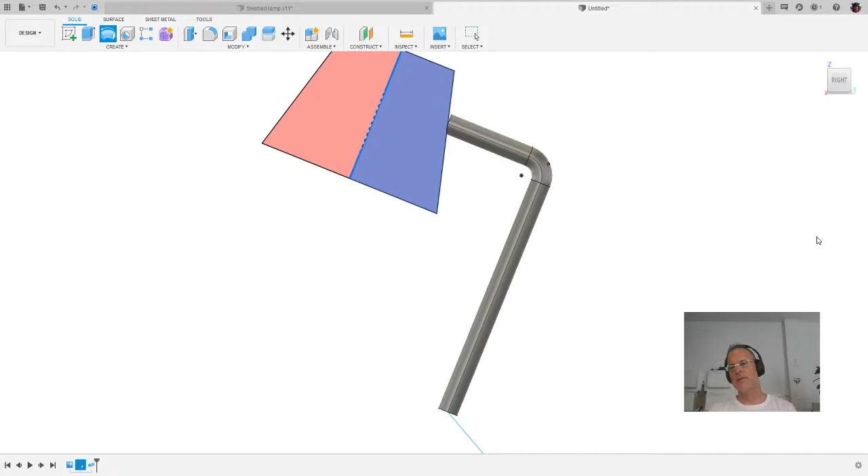But of course, I do not want to make a cut. I want to create a new body. So I'm going to do this, a new body. And by doing this, the preview changes, and this is my lamp shade. And I'm quite happy with it going all the way around, and I'm going to say OK. Now I'm going to undo that and do it again so all of you can see it quite clearly.

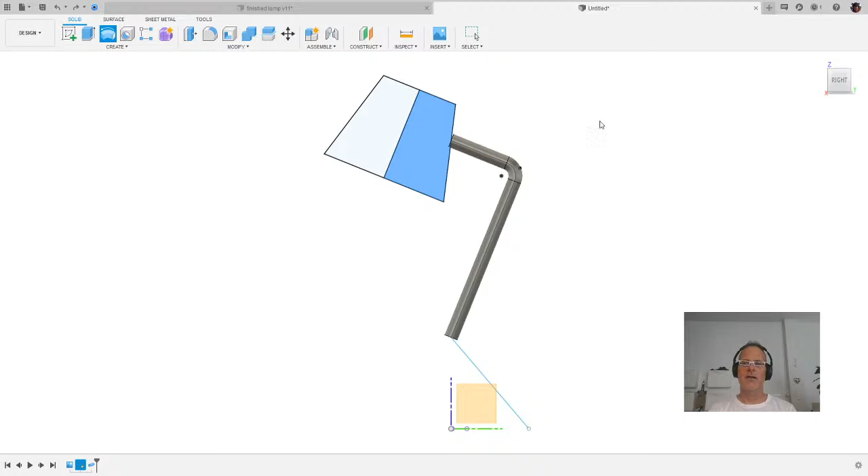We're going to create a revolve. The system is asking me what profile I would like to revolve. I'm going to select this. And then it's going to ask me which axis would I like to revolve it around. Hence, it is so useful that I was able to draw this line here, and it will then revolve that.

Because we're going to be trimming off this little bit of material here, the system assumes that's what I want to do, and it's going to tell me we're going to cut. But I don't want to cut. I want to create a new body. And as a result, when I say new body, you can see I have a new body being created here by the system, and I can then say OK.

Unlike last time, when we did this, it does not turn off the sketch once you've turned it on explicitly again. So it's going to leave this active, and that's going to be handy for me because I'm going to use it for some other things.

You'll notice also that when we created the pipe element, it created a folder called bodies, and there is a body in there that is the pipe. And because I said a new body, I have a second body, which is now the lamp shade. So you can have those two in there. And here again, just like all the others, I can turn those on and off as I so desire.

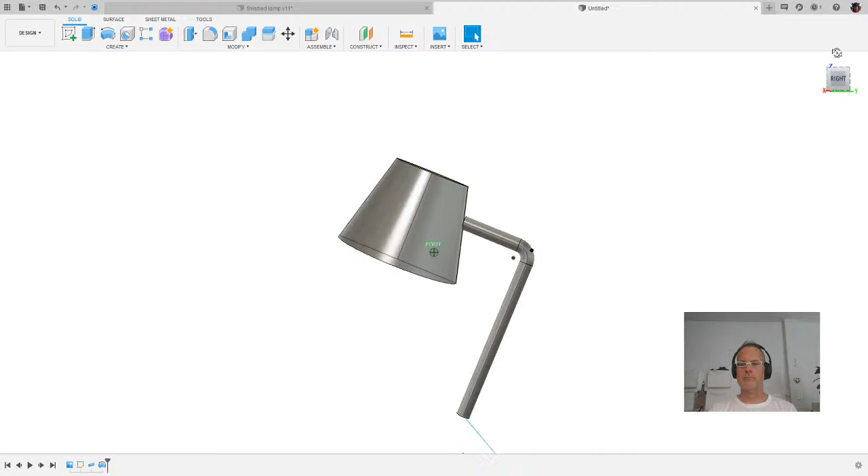Now, you'll notice that this lampshade is not very useful because I don't have any space inside to put a light bulb inside of it. And there are several ways I could have done this, and I'm going to show you one now. Let's turn the sketch off quickly, and I'm going to use a command under the modify menu to modify existing geometry called a shell.

A shell will create a thin-walled structure of a thickness which I define. And any faces which I select will be removed. So as a result, if I want to shell and I select this face, it will be removed, and I can give a thickness using either the on-screen preview or here in the dialog box. And in this particular case, I might make this thing, let's say, 4 millimeters thick.

Now, okay. This is handy because now I have space to put a light bulb in and all the other stuff that I need. Let's undo that and show it to you again so you can follow along. The shell is no longer there. I've turned my sketch off. I'm going to the modify menu, and I'm going to use the shell command.

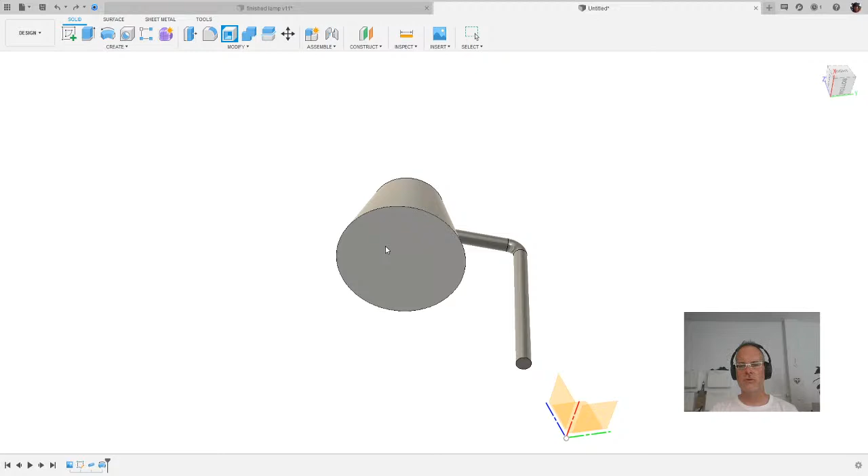The shell command will always remove those surfaces which I click on, and you can actually click on multiple surfaces. So I can click on these two surfaces, and I'll just show you what happens if I do this. I'll pull a thickness out, and I would remove the top and the bottom. This may be just the sort of lampshade you would like to have.

If you do not like what you selected, you can always go into the pop-up command, and you could actually get rid of that selection with a small x, and I could reselect only the one, and I can give an exact definition of 4 millimeters here on the inside. Now this is quite good. This is exactly the sort of lampshade I would like to have.

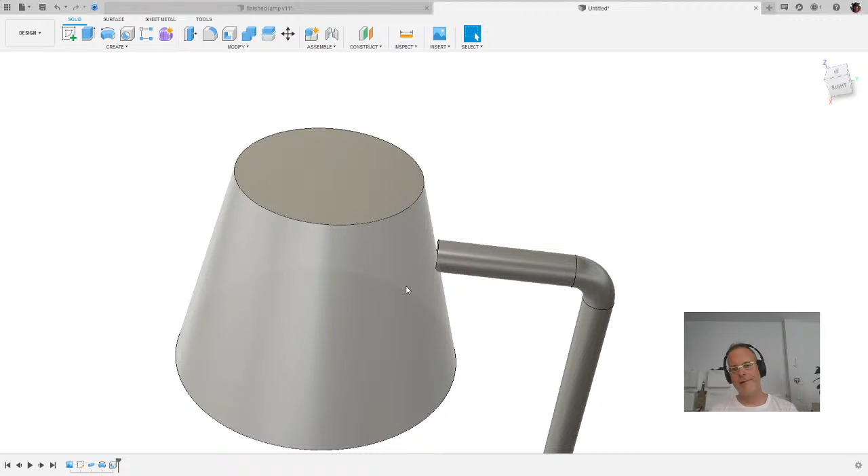But you will notice there is a small problem here, and this is this area right here where these don't actually line up at all. Huh? And it's actually sort of a problem here as well, that these are two separate bodies. I actually want to have these be together. So what do I do about that?

Well, the first thing I can do is use, under the modify menu, the command combine. What would I like to combine? I would like to combine body 1 with body 2, and they would be joined. This makes both bodies joined together into one body. That's useful because later I want to actually 3D print this, and it's going to be all one piece. That may or may not be useful, but in this particular case, it's what I'm going to do.

Now, let's undo that again so you can see that process again. I want to make these two bodies under the body folder one. So I'm going to modify, combine, and the target body is body 1, the pipe, and the tool body is body 2, the lampshade. And they are going to join one another. That should be creating one body. This will allow me to fix this little issue right here, right?

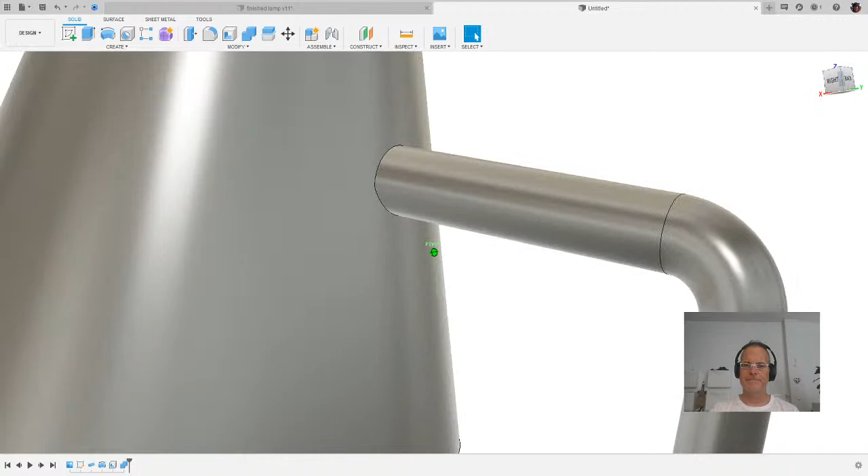Now you can zoom in here and do quite well, and you can think about, why did I get this artifact in the first place? And this is a problem. Things like this turn up in CAD all the time, and they shouldn't be here. Where did it come from?

Let's look at that sketch again. If I double click the sketch, you'll see that my sketch goes up to there. And then I created my pipe, and that pipe went to this point here. But of course that pipe goes down to here, and it goes up to here. A solution to this would be to extend this line in to a certain extent, and then have it be inside this. And in some systems, you might have to do this.

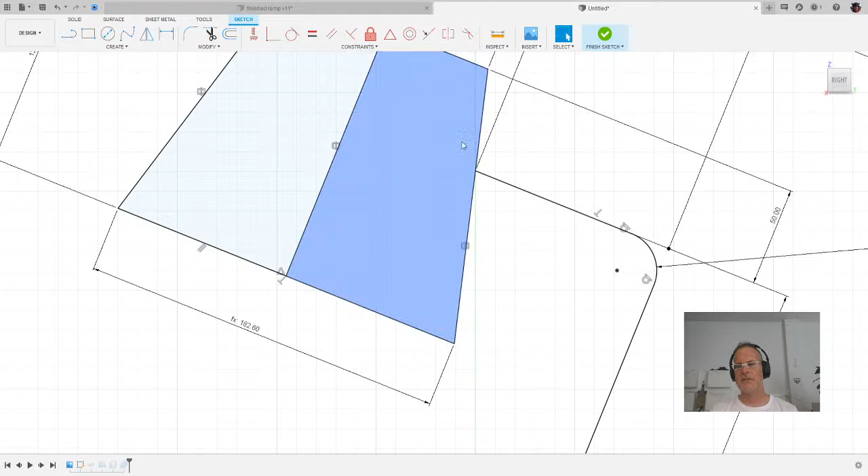There are some other solutions where you could patch this up and fix it all up, but it's not really nice. Fusion has a little known feature, and we're quite slick about this. We can get in here really closely, and you can select that surface. Now I'm going to show you another little trick that's also hidden.

It can sometimes be difficult to select the exact things that you want. So let's just get kind of close and zoom in to the general area, and I know back behind there there's a surface that I want, but I can't quite get it. My mouse skills aren't good enough. If you click and hold the left mouse button for 2 seconds, you will get a multi-select feature.

If you have this, you can release your mouse once you have that, and you can easily cycle through. Is this the face you want? No, that's not it. Is that the face you want? Well, yes, indeed, it's this one highlighted at the back. Even though I couldn't get it directly, I can still select it easily using multi-select, and it will work with faces, points, reference geometry, lines, anything you want. So use it, and use it often.

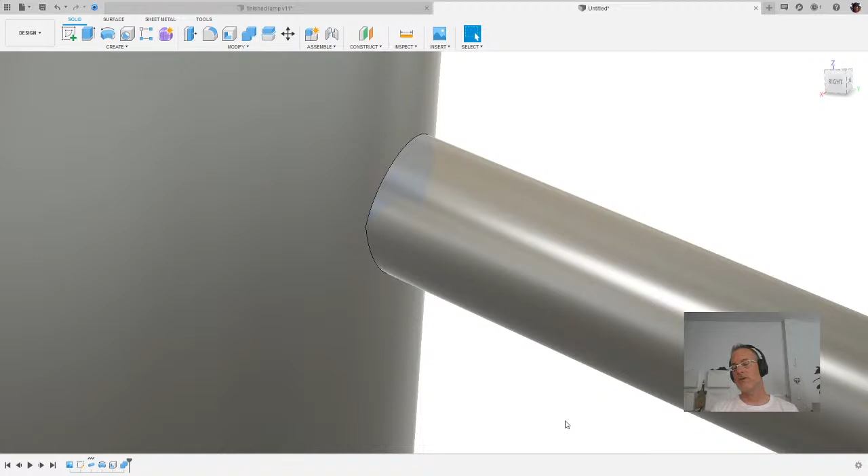Now that that is selected, I can use another secret feature of Fusion, and you won't believe this when you see it. Since it's selected, all I have to do is hit the delete key. I deleted that face, and Fusion says, oh man, Mickey just deleted that face, what is he thinking? I'm going to heal this geometry. It's going to try to figure out how to put this geometry back together in a way that makes sense, that is contiguous and manifold. It will often heal things like this just the way you want it to. It won't always work, especially when things get really wonky, but in a lot of cases it does work, and it's a nice little feature of Fusion to know.

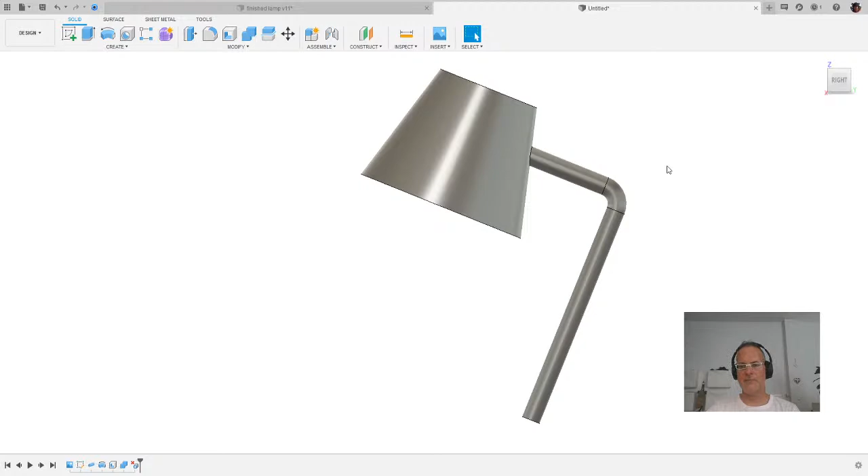So you can do that all you want, and that is exactly what we wanted. It's much easier than any of the other methods I could have thought of to fix that up. Now, we're just over time, and I want to keep going so we can really knock it out.

Let's turn that sketch back on, and let's worry about this leg down here. This leg is just like one of these pipes right here, so let's do that again. Let's say create pipe, pipe, pipe, pipe. There it is. I'm not going to do the chain select this time, I'm just going to use that one right there. Again, it's going to say cut because it thinks we're cutting down here. We don't want that. We want a new body. That's fine.

Now, if we look at that canvas again, you'll notice we have 1, 2, 3, and then we have a fourth one over here. How do I get this one around? Well, that's pretty easy. Let's create a pattern, a circular pattern. By creating a circular pattern, I can pattern many different kinds of things: faces, bodies, features, components. In this particular case, I just created a body, so let's pattern the leg body. What body? This one. You could either select here or select there, there's no problem. And then you can select the axis about which it should be patterned.

And this, ladies and gentlemen, is quite the reason why I put this zero point so conveniently located right here under this thing. Now, how did I know to do that? Well, I've done this about 5,280 times, that's how I knew. But you will develop a sense of these things when you start looking at geometries and imagining geometries and how to build them. It does take practice. If I did not have an axis here about which I could easily pattern, I would be stuck going into my sketches and creating geometry about which I could lay an axis, and I would need a few more steps to get the axis I needed.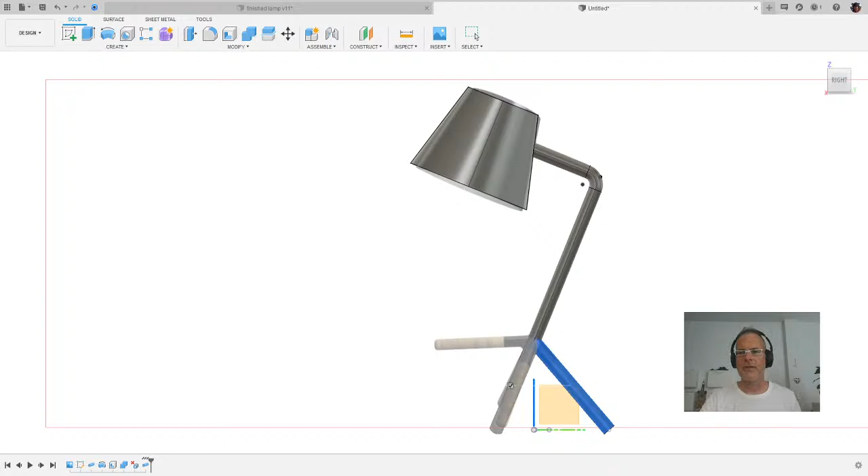So that's one of the reasons I put this there in the original placement of the canvas. So let's select that axis, and you'll see it'll ask how many of these you want. I've actually done this before, so it's going to remember that I wanted 3, but I could do 3, 4, 5, 6, 7, 8, however many I want. You can choose to turn singular ones off, but we don't want that, we just want 3. That's fine. The 3 that we have, you're asking, what about the fourth? Well, that fourth one isn't actually about that center axis at all, it's a different beast entirely, so we're going to handle that in a different way. If we say OK, now we have those legs there, and we're getting very close to what we need.

Now let's handle this last leg here, and I'm going to show you something that's a little bit special about Fusion. Fusion will allow you to easily do things you might know only from Windows systems. If you right-click on body 3, you should be able to say copy, and then you can go up to the document itself and say paste.

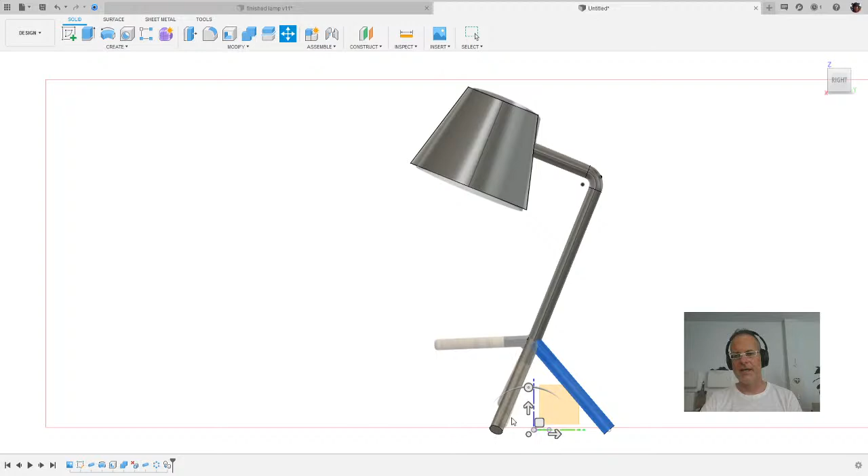This has pasted an additional body in here, and now I can take this, turn it around, move it up, turn it a little more using the gizmo, and place it almost where I want it to be. Remember, this is a concept model, it does not need to be perfect. So I'm using the canvas again to place this in the right spot, and that looks quite nice.

Now I'm going to undo all that and do it again quickly so you can see this, because it's important and this is starting to get a little complicated. This looks nice, that's fine. Turn the canvas on, that's fine.

That's where we were. So let's first take care of the pattern for that one thing. Create a pattern, a circular pattern. What are we patterning? Bodies. Which body? This body. About which axis? This central axis. By the way, if you cannot see this central axis, you might have turned it off at some point and it's no longer visible. Turn it back on using the eyeball, click on this, tell it you'd like 3 examples, and click OK. You'll have additional bodies in no time flat.

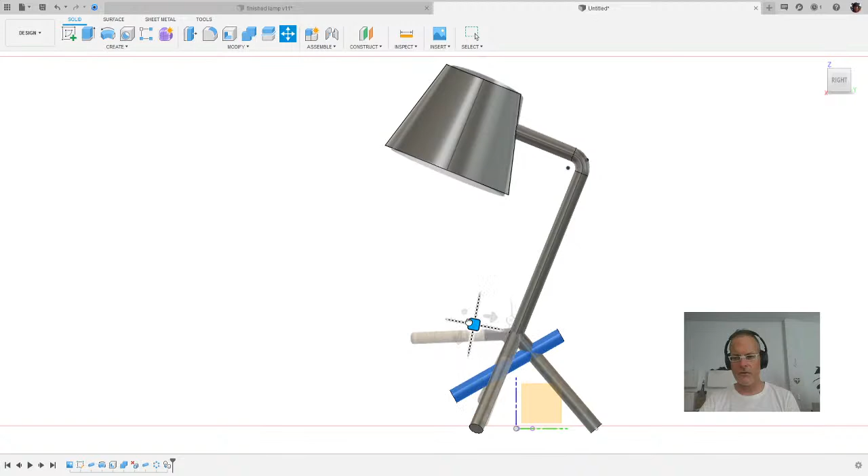The easiest thing I find to do is use the gizmo to twist this thing around, use the arrows or the plane movement key to get it just about where you want it to be. Remember, the perfect is the enemy of the good. Get this somewhere like that. And this is our concept model, it's just a concept model - don't freak out about exact placements.

Because it was created on that second middle plane and we haven't moved it out of that plane, it should be exactly in the middle, and then we can hit OK. And to prove it to you, we can look at it from the side, and it does look to be in about the same place, right?

Now, I do need to speed up a bit for the last little bit, so I'm going to keep going. And if you didn't quite get this, you can look at the recording later and figure it out, I'm sure.

Now, one of the things you'll notice is that if I look at the canvas - let's turn all the bodies off and look at that canvas again - the canvas has a nice picture here of some wooden legs. And of course, I don't have wooden legs here, I just have singular pieces, and they have to actually be different textures and colors later. So let's turn those sketches off and turn the bodies back on.

The thing is, I would like to split these, and I also want to round them. Now, you could go in here and split this into a separate surface, and that one into a separate surface, and that one, and that one - it's quite a lot of work. And then you can round there, and there, and there, and there - also quite a lot of work.

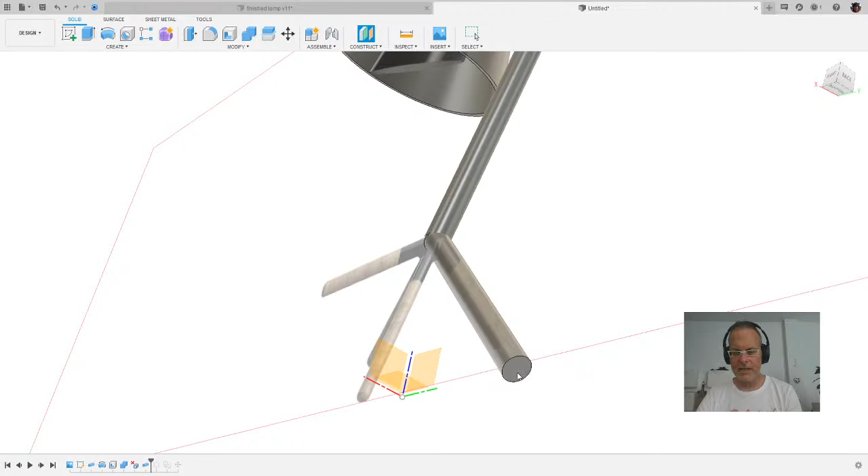Now there are a number of ways you can do construction planes, but these are imaginary planes which you can sketch on, measure from, do all sorts of things from, and one of them is the offset plane. So let's take that one. I'm going to offset from this nice flat plane at the end of my leg, and it's going to ask me what's the offset. I'm going to eyeball this and get right about there. I could do this exactly if I wanted to measure it all out, but this is a concept model, so I'm going to put it at about the area where the wooden leg ends. I'm going to just push it there and say OK.

This construction plane is now there. It's quite handy. I also have a construction plane folder, and you can see it here. It is a two-dimensional plane in three-dimensional space.

This is quite handy for me because now I can say modify, and I can modify by not splitting the body - that's important, we'll talk about that in a minute. We're going to split the face. What face are we going to split? We're going to split this face into two separate faces, and what are we going to split it with? We're going to split it with that construction geometry. And when I do, bam, I can turn off the construction geometry, I don't have to see that anymore.

Now you can see I actually have two surfaces. These two surfaces belong to the same body, and that's important that they do, because we do have the command split body and split face.

If I had split body, however, we would have a problem. This has to do with parent-child relationships, which have to do with the timeline. Do you remember we created the body here by using the pipe command? And then right after this, I created a pattern. What did I pattern? I patterned bodies. Now if I patterned this body, and then subsequently I made a change and split this body into two separate bodies, that would mean that this pattern here would no longer understand which of these two bodies it is supposed to actually pattern.

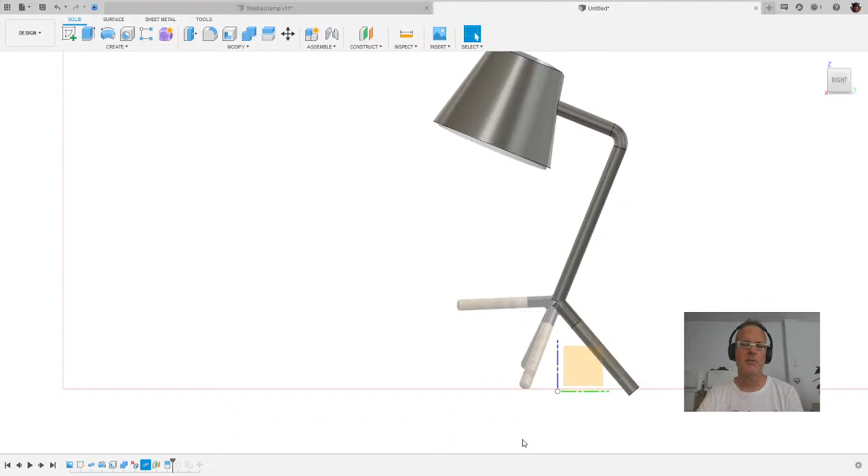So that's one of the reasons I decided to split the face, only the face, and not the body. This is only a split of this surface and not of the body itself. But that's all we need because I can put textures on this - I can make this look like wood and this look like black plastic, and we should be fine. Now in the same way, I want to round this edge, so here I'm going to do modify, fillet. This is a three-dimensional fillet that is not in the sketch, this is on three-dimensional geometry.

And so I can just select that edge, and just like so many things in Fusion, I can eyeball this and go all the way down. Now, it will actually give you an error. And what is it going to give you an error at? Once I get to 10 millimeters, I have completely used up that bottom surface. It is not there anymore. If I go over that limit, it will actually tell me there's an error. It will not really know what to do. So that's what that's about.

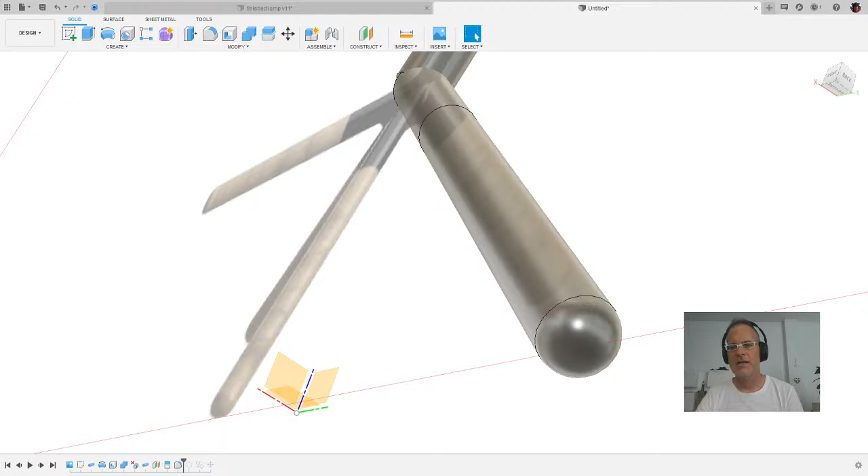Now, 10 millimeters is just fine for me. That gives me a nice, completely rounded surface, quite nice. I can do that. I'm happy with that. And now watch what happens when I go back and do that pattern. That pattern will update the split faces on each of those additional legs, plus the copy and paste and the move that went along with it. That puts all those things just like I wanted.

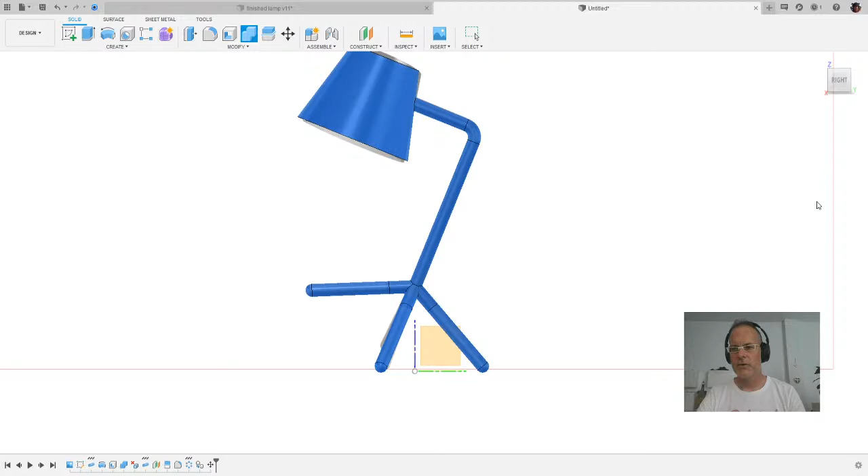The last thing I'm going to do, just for the purpose of making this all nice and tidy, I am going to combine, and I'm combining the first body with all the other bodies. And I'm going to join them into a single body. This is because this is just a concept. I'm going to turn my canvas off. I'm going to turn my sketches off, and I'm also going to turn my origin off. And you can see right here, we've got a nice concept of a lamp. All right?

Now, the last thing I want to show you is to go into the rendering environment. Not that this is entirely necessary, but as long as we're here, we can do some nice things in the rendering environment that is in Fusion. Let's go back into the design environment to show you this, because an amazing number of people do not know that if you click here, you have a whole series of different environments, and one of them is the rendering environment.

And the rendering environment is, first of all, really, really scary because the toolbars completely changed, the colors and the view of everything changes, but this is creating a rendering environment. So as a result, you always have perspective views, you have some limited rendering of shadows and lighting, and your materials look a little better. This is as intended. And we can basically work from left to right over the top of this and change our appearances of our materials.

And so we can go in here and we can search in the library and say, let's make plastic, if you so wish. And I am going to make ABS glossy black plastic, and I'm going to drag and drop onto this. And you'll see that this now is plastic glossy black. The appearance changes a bit. And if I go in and say wood, whoop, shouldn't hit the enter key. Wood. You'll see I have a whole series of wood sorts available.

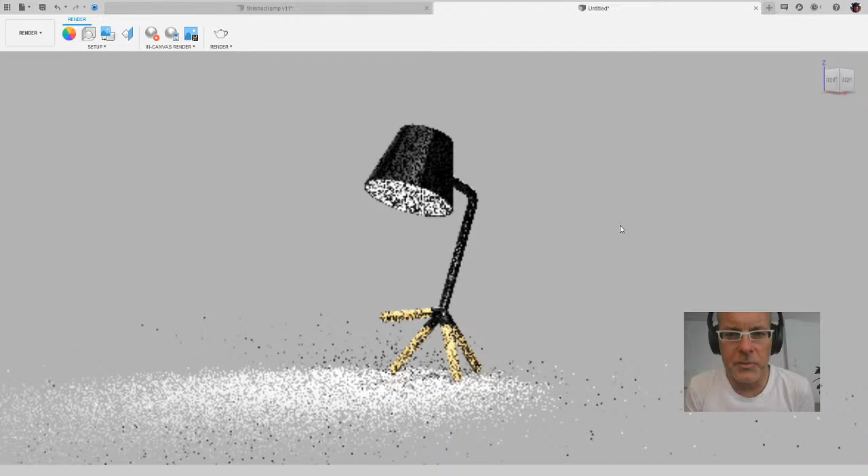And there's a number of different settings that we can do, but the easiest thing we can do is an in-canvas render at this point. And it will render on my local machine, so my poor little computer will start rendering away. And you can see it is calculating in an iterative fashion the light, how it creates shadows, and it starts out being quite fuzzy. And as time goes by and the iterations continue, your picture gets better and better.

And of course, the more effort you spend on your rendering, the better your rendering results will be. And you can take it from me, these rendering results can be very, very good indeed, with a little bit of skill and a little bit of effort. Now, this looks really great, and you might say, wow, Mickey, I couldn't believe after 2 hours that I would be able to do something like this for the first time ever. But we're just not done. Let's hit the render stop.

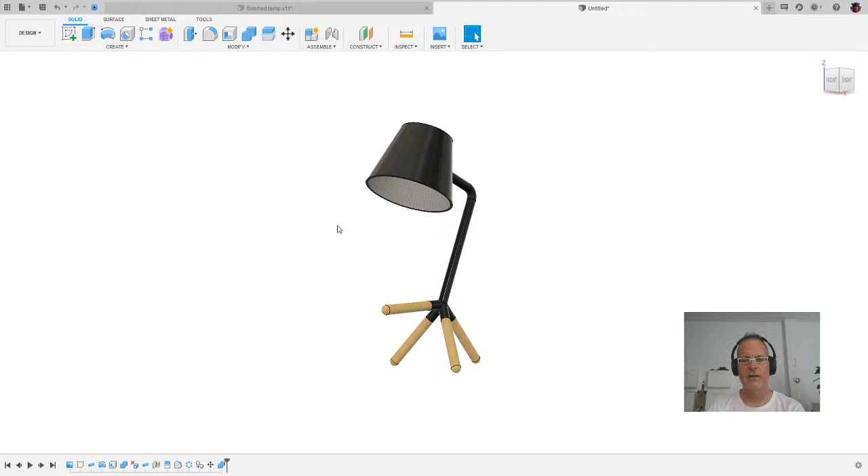Let's go back into the design world, and let's imagine we're in a real design office. So we might want to do some different options. So if I go to this body and I say copy, paste, right? And I'm just going to move that new variation there. I'm going to say paste again. I'm going to move a new variation there. Let's go back into the rendering environment. Look at that sort of from the same angle.

And this time, I'm going to talk to my boss about what lamp we should be making. And I might want to tell him that black plastic, it just ain't really a thing. Let's do it with glossy red. Let's do it with glossy green. Keep the appearances to the faces, otherwise you'll lose those. There's wood in those. And by the way, painting that inside with fabric white is not nearly as awesome as making the inside edge of that gold.

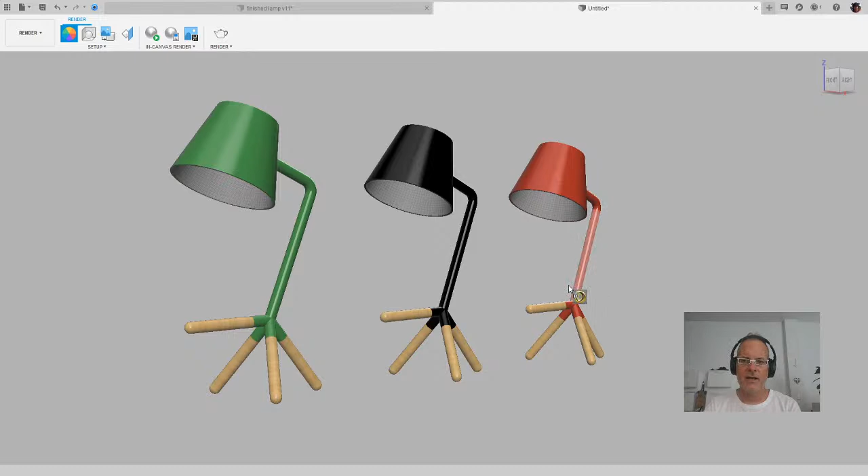Now it could be polished gold or it might just be painted gold. And in this particular case, I'll say gold polished. Let's get it in there and make it gold polished on that inner face. And watch what this does to the light when we actually show it. Let's do that in-canvas render. And you can see it makes a much different light. It makes it much warmer, makes it much more friendly.

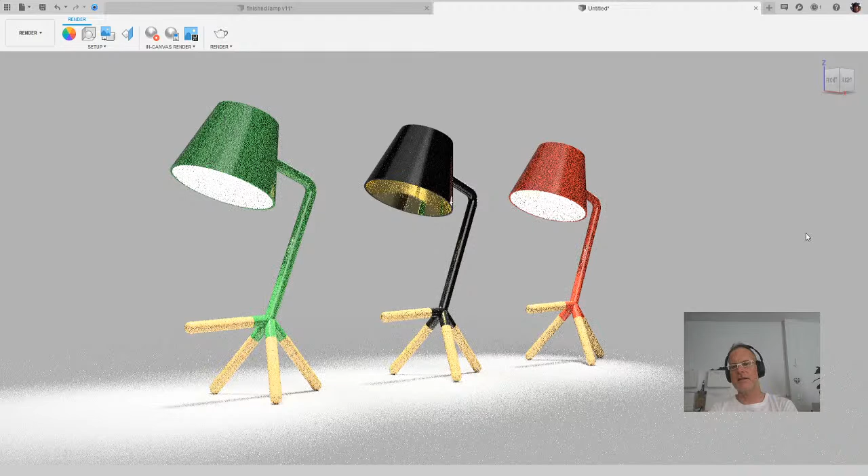And I know this because we have a lamp in our bathroom that was painted in this fashion. I was impressed by what a difference it made in how that lamp worked in the room. Now this is what you do with Fusion in real life product design companies. They come up with variations and variants of this lamp, and they decide based on this. If they decide that this lamp is almost right, but not quite what they wanted, they can go back into the design world, and you can easily edit this sketch and make this 300 high.

You could make this 145 high. You could make this lamp skinnier and make it 80 across. And you might even be able to put this up to 80 degrees. So we've made some significant changes to this lamp, and by doing this parametrically, they all update, and we can go back into our rendering environment and see how they would look. In general, we might actually do this with variants of the lamp over and over again.

So that was a lot of information for today, and I'm not exactly sure if it's really, really good to use a live stream format to try to do one-on-one training.